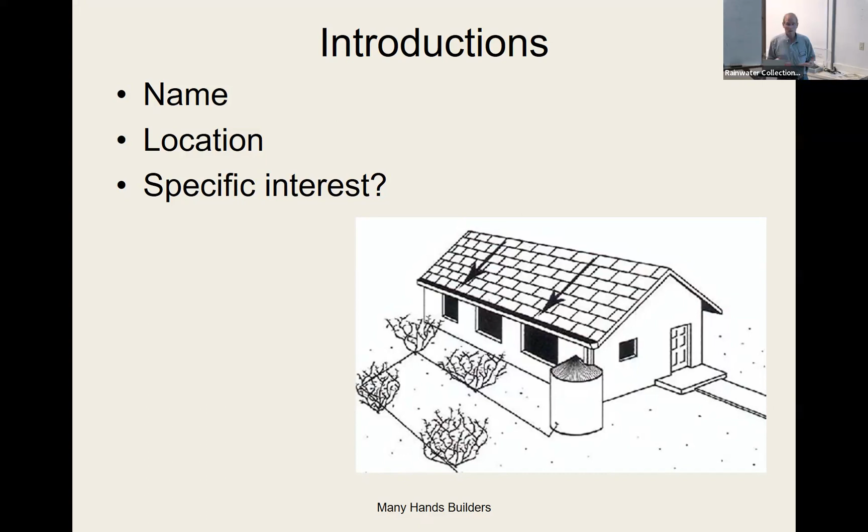Okay, and then specific interest. Are you here to learn about just supplementing an irrigation supply for gardening, or for fire suppression, for potable water perhaps? Show of hands for just fire suppression - how about, that's about maybe 6 people. Show of hands for people mostly interested in irrigating, garden, landscape, that sort of thing. It's almost everybody, and that's probably what in my career I saw people being most interested in.

Okay, so we're going to talk about the things you do before you invest in a rainwater catchment system. This is something that Angie Boudreau, who used to work for the Soil Water Conservation District here, made me promise to do when she dragged me into this business 13 or 14 years ago. She said, don't just put a tank under a gutter.

Make sure people do all the other things first because they're going to save a ton of money. So the first dozen slides or so have nothing to do with tanks and collecting the water - it's how you make the rainwater that falls on your land do you some good, or more good than it does. Then it's determining the water demand, estimating your potential collection given your surface sizes, your roof surfaces, then all the elements that are part of a rainwater system. For example, the roof, gutter, a first flush device if you need to use it - not everybody needs one. A filter of some kind that takes the leaves out of the gutter or out of the water stream. And then the conveyance, the piping that takes you to the tank, and then the way you get the tank to the point of use, whatever that is, whether it's going to be a garden or a fire hydrant. So we'll take each of those elements in turn and talk about your options.

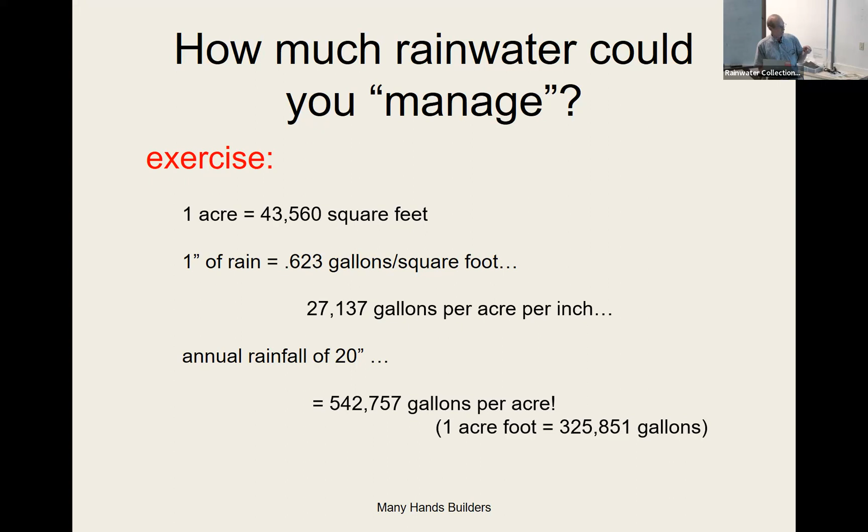Just for reference though, an acre foot is what irrigation rights people have. Does anyone here have irrigation rights to a ditch or anything like that? Okay, so your allotment is measured in acre feet probably, and you may have half an acre foot or a full acre foot - that's how much water you have access to. So the comparison is pretty dramatic, right?

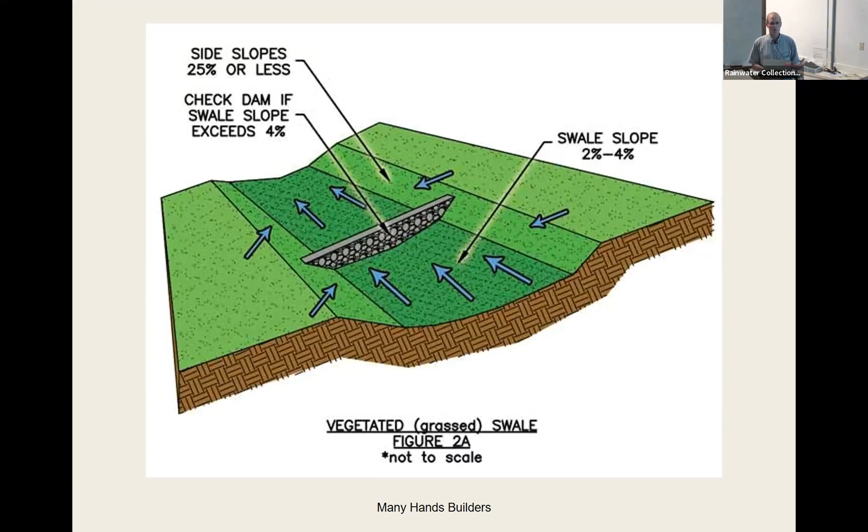You could do a mulch basin, which is very common in gray water design, where your gray water pipe ends would go into a basin where it would drip down to the base of the tree. You could also do things like this, where you put in a check dam on a dry stream and just slow the water down. You're not trying to create a pond, you just want to slow the water down so it infiltrates the soil where it might do the roots of the plants around it a little more good.

So do things like this first. If you have tractor lanes, paths, or driveways and you see erosion on them, consider grading it so that the water is spilled in a place you want to control, where it goes to a group of trees you've planted, perhaps. These are called, on trails, grade dips or nicks, but you could do these on roads as well. That just controls the direction and flow of the water so it doesn't erode your driveway or path, but you can control its direction and make sure it goes to a point of what you feel is a beneficial use.

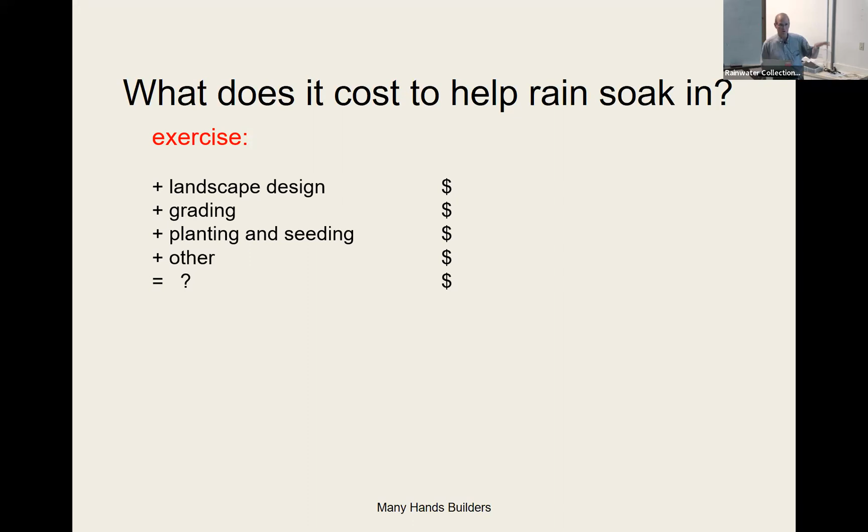Okay, I've anticipated part of that. I know that my cost for someone operating a grader or any type of heavy equipment is about $1,000 a day. I'm going to guess at a design fee, let's say it's $1,000 for an acre for something fairly simple. For planting and seeding, I might go to Plant Oregon or Shooting Star and buy some native plants, and that might cost me another $1,000. Buy a bunch of seeds and things, another part of that $1,000. Other costs might be adding an irrigation system to keep things wet while they're growing, before they have enough root to survive on their own once I turn off that water. So let's say we have a $4,000 cost here to do some of these basic measures to help water infiltrate into the soil better. This is cost per acre.

Now, remember that number of about 5 million gallons per acre of rainfall? If we divided that 5 million gallons into that $4,000, does anyone have their calculator open right now? What is the cost per gallon to invest $4,000 to do a better job with what looks like 5 million gallons of water? I'm sorry, it wasn't 5 million, it was 500,000 — I forgot what the number was. 542, right. So what is that? What's the cost?

So before you spend a ton of money, 75 cents to close to $3.50, $4 a gallon on a rainwater catchment system, think about all the things you can do that are much less expensive. Now, the disadvantage of all these measures you do to improve your landscape so it'll let that water infiltrate better is that you don't control when you get to use it. It's not available to you in July, August and September. That's the downside. But if you do these measures, you might not need to irrigate in June, and you may be able to stop irrigating sooner because the rain that falls in October might make a bigger difference for you. So you shorten the window of time that you need to irrigate.

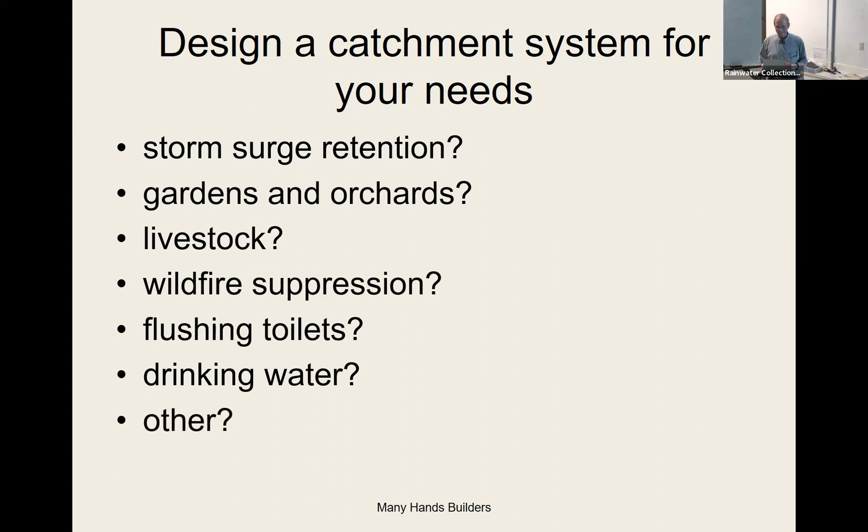Gardens and orchards, people mentioned that. Livestock, anyone here looking for that? We have some livestock, right? Wildfire suppression, pretty big issue for most of us. Flushing toilets, anyone interested in that? Okay, good. And then drinking water, how about potable water systems? Yeah, okay, that's a complicated one, but it's doable. And then the other might be something like landscape features, pools or water fountains, things like that.

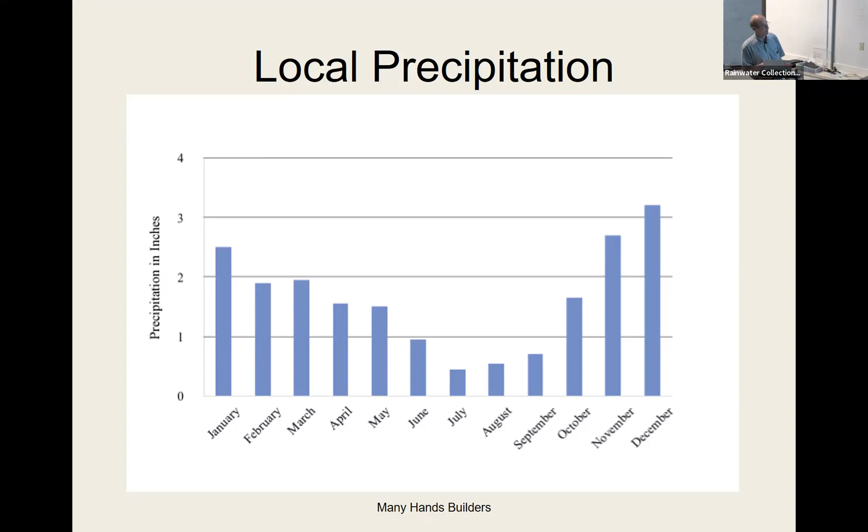Because of our topography, we have a lot of varied rainfall. I understand that up along this area, as you're approaching the Cascades, you get more rainwater than if you're in the valley. Parts of Sterling Creek and the drainages just south of us here are in the 13 to 14 to 15 inches a year category. But over here on Thompson Creek, I have friends who report 30 to 40 inches a year. So it's a lot of variety based on topography. If you have an idea of what you're getting in your area, ask a neighbor who has a rain gauge and they can tell you. That would be really helpful because that's going to help you plan the next steps.

A little bit about permitting - this is not a fun subject.

It's kind of dry and boring, but first question: is it legal to capture rainwater in Oregon? The answer is yes, it always has been.

It's never been illegal. It just has to come off of a roof and go into a tank. It can't go onto the ground and then into a tank. It has to go into a tank directly from the roof.

So if irrigation system is your only use, then you do not need a permit in this county, but there's some conditions on that.

If it's a potable system, you have to follow all of the requirements in Measure K or Appendix K, which are pretty stringent because they don't want people getting sick, and that makes sense. We'll get into what those are.

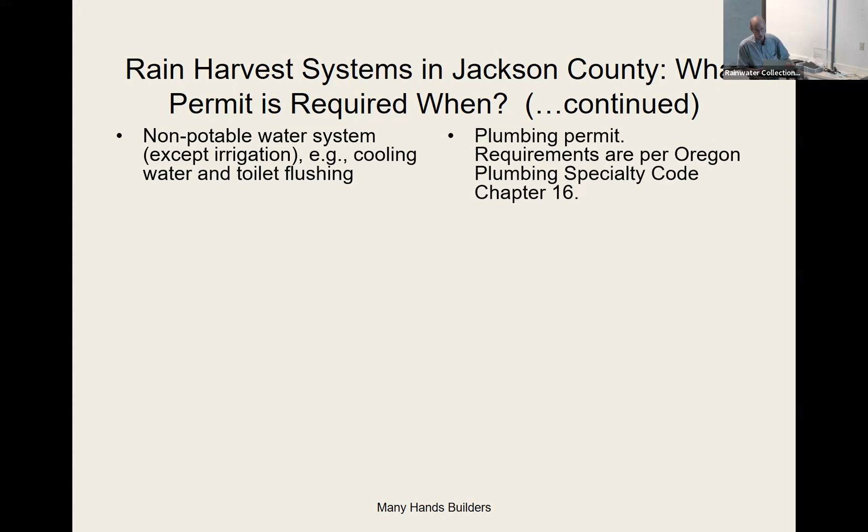For a non-potable system for cooling, evaporative cooling, or for flushing toilets, you need a plumbing permit. There's a whole code on how to do this. Your plumber would be familiar with that. You can download the code if you can find it - they hide it on the internet.

For electrical equipment, if you're going to power that water or pressurize it in any way, and want it hardwired into a panel, you have to pull an electrical permit for it as well. If you're lucky, you can use gravity to do all your pressurizing and won't have to worry about that.

Anything larger than 5,000 gallons, a single tank larger than 5,000 gallons, has to have a building permit. The reasoning is that the county's concerned these things are getting to weigh something like 40, 50, 60 tons, and they want to make sure the ground underneath will support it, that it's got the proper pad, and that in an earthquake it won't roll down onto your neighbor's property. So there's a reason for that.

But if you had a series of 5,000 gallon tanks all linked together, let's just say there's some ambiguity there.

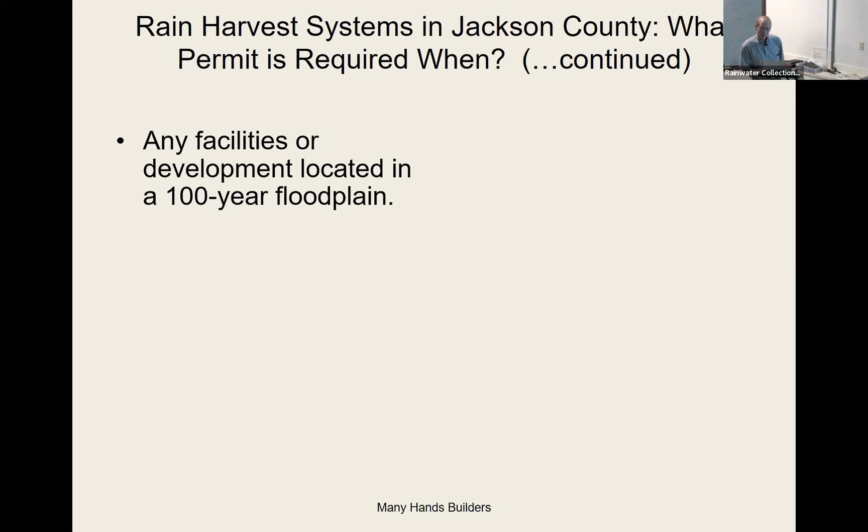Any facilities that are in a floodplain have to go through a review process. And most of us probably aren't in a floodplain, guessing.

The Soil Water Conservation District is a fantastic resource, and I highly encourage you to explore working with these guys. They have grant funding and grant writing assistance, and Cora Mousseau - here's her contact information, it's in the handouts - is a fabulous resource on this. She talks about conservation all over the county, so she's really a good person to be talking to about this. You might get tanks at a discount, you might even get a huge screaming deal on a tank.

If you live in a city like Ashland or some parts of Jacksonville, you may need to comply with some historic district issues. They don't want a big plastic tank in the front yard of an old mansion of some kind. Typically there's a height restriction, can't be over 6 feet. They want to make sure there's enough clearance in the side yard so fire department personnel can pass through with hoses in case they have to get to the backyard. But those are really the only requirements. They don't want to discourage people from having a rainwater collection - there's just some conditions that they want to make sure people are aware of.

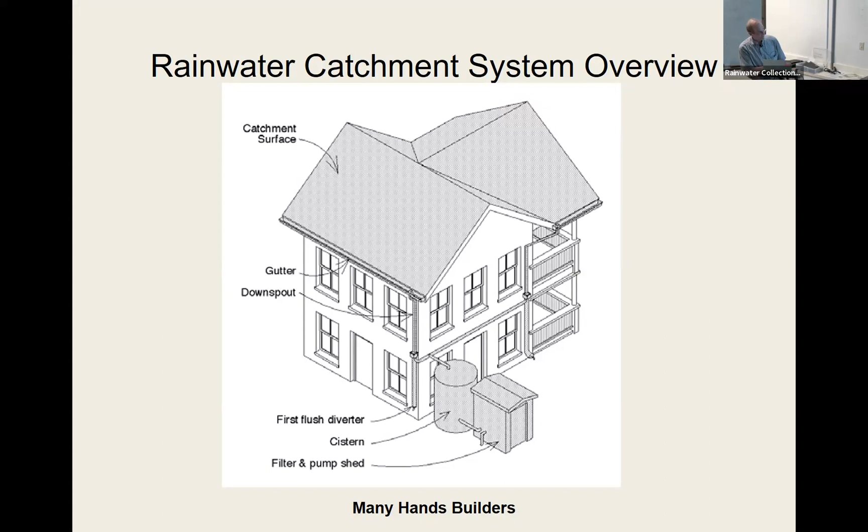Okay, so now we're going to jump into the actual rainwater collection systems. An overview one more time of all the things in here. We're going to start on the roof, look at gutters, downspouts, any type of first flush device for filtration on that downspout, the tank and the types of tank options you have, and the ways you get the water from the tank to the point of use.

The easiest way to determine your footprint for your roof, if you don't have your building plans and don't want to get on a ladder with a tape measure like I used to do, is you go to Google Earth. They have this really cool feature in the toolbox that has a tape measure on it. You click on it and you can go from that corner to that corner, to that corner, to that corner, and it'll give you a graph and tell you the square footage, or it'll at least give you dimensions so you can calculate square footage on your own.

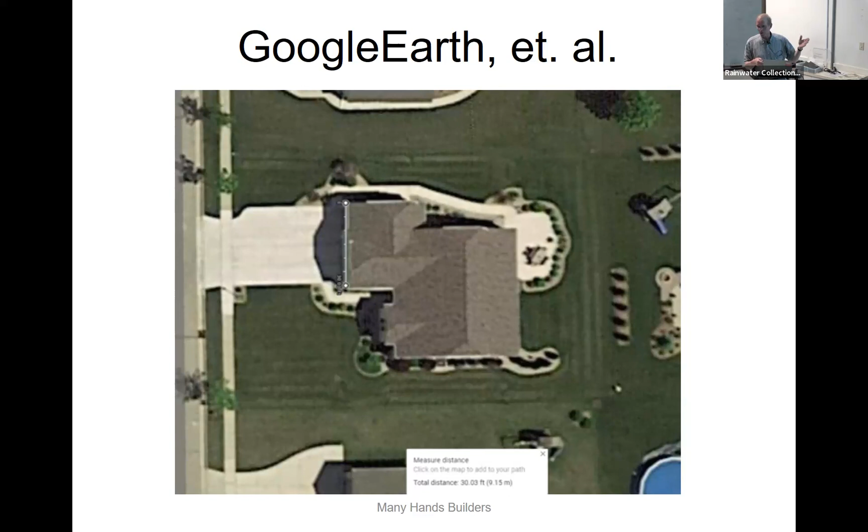And it's a great tool. I believe it's still free - I can't remember, it's been a while since I used it. There are actually roofing programs that, if you know a roofer, they could do this for you as well.

So question, exercise here. How large is your roof? Does everybody here have an idea of how big the roof is? Okay, take just 30 seconds and take your square footage of your roof size, multiply it times 0.623, times the average rainfall depth that you believe you have in your area. And I want to hear some numbers. I want to hear what you think your roof can collect.

12,500 gallons in a year. Okay, anybody else? 41,000 gallons in a year, okay?

I'm going to throw in my number. It's 55,000 gallons. I have a house, a garage, a couple of outbuildings, a shop, a bunch of stuff. They're all connected to my system. I collect a lot of water. I could collect a lot of water. I wished I had that many tanks. Anybody else have numbers?

10,800. Okay, that's without the safety factor. The safety factor is for water that splashes off the roof or might get lost in transport. Subtracting 5 to 10%, you could just multiply it times 0.95 and you're good to go.

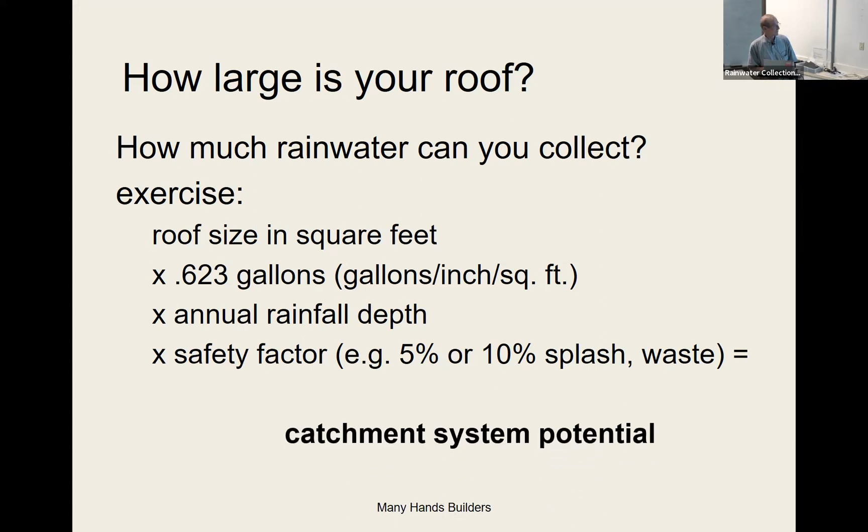Most people are startled by the amount of rain they could collect in a year off their roof. That's a big number for most people, and it's way more than is going to fit in the typical plastic tank. That's kind of good news. I mean, it's not like it's not a worthy thing to do, it just means you need a lot of tanks to collect all the water that comes off of a roof. That's your catchment system potential.

Now moving on to the type of roof. The cleanest water that can get into the tank is coming off the cleanest roof, and that would be a metal roof. There's just less stuff on the roof, grit, pieces of wood, whatever that might get caught up in the water supply and then get deposited either in your gutter or in the tank itself. So if you had a choice and you had roofs that had metal on them, that's where I'd put a rainwater collection system.

Followed by tile, which is also a hard surface, doesn't really shed material off of it, but has lots of nooks and crannies for moss and things to grow, and that would end up in your water supply. Followed by shake, which is a bad idea in a fire-prone area, but it's also cleaner than asphalt shingle, which is unfortunately the most common roofing system that we have anywhere in America.

But a lot of people use these kinds of roofs for irrigation, fire suppression, and everything else. So if you have this, don't just go out and get a new roof because of the asphalt shingle. You could still use the water, you just don't want to be drinking it. It's too hard to filter the hydrocarbons out.

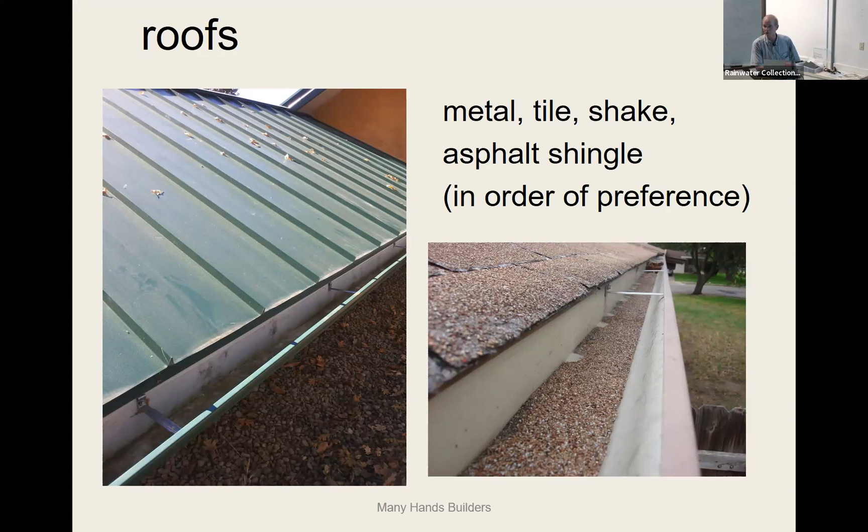Okay, right button. How many of you get snow 6 inches at a time, 10 inches at a time, and then it slides off your roof? Anyone have that problem? Not very often? Okay, it happens to me every year. I lose at least 2 inches a year—2 inches of water, because roughly 10 to 12 inches of snow is an inch of water. So I lose 2 inches every year.

And if I were worried about it—people in higher elevations maybe—you can install these snow brakes on roofs that will prevent that snow from sliding. If 2 inches is going to make or break it for you, then I definitely consider snow brakes.

A little bit about gutter anatomy. They attach to the board that caps the rafters, called a fascia board. And they can attach in a couple of different ways - they have straps, screws or nails, or a bracket, but they have to be pretty secure.

Gutters usually have a drop or a hole that's 2 or 3 inches in diameter in our area, which drops into the downspout itself. So that's kind of the anatomy you're looking at.

Rolled gutters - that's where you see the gutter companies that come out with a big coil of steel, fold the metal through a form, and put this 100-foot length of metal on your roof. That's the best way to go because it doesn't have joints that leak, but you can use sectional gutters as well. Those are the ones you'd buy at the big box stores.

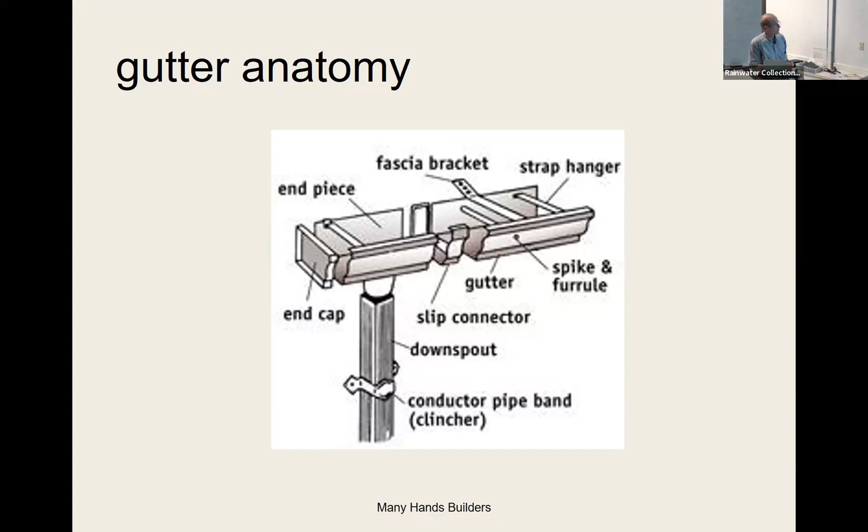Gutter sizing - we're not going to get too deeply into this. I highlighted it on my presentation, but it's not in your copies. Every part of the country has a 100-year storm event average, and ours is 1.3 inches per hour. That's what we expect in a major rainfall event in an hour. In the news recently, you might have heard of storms in Kentucky where they got 6 inches in an hour.

New Orleans typically gets 8 inches in an hour, Miami is the same - they get a lot of rain during a hurricane. So we're kind of on the low end of the scale. But that's the maximum event you want to plan your system for, because if you get that kind of rain, your system should be able to handle it. Worst case scenario, if it doesn't, you just don't get all the water that comes off your roof because your system overflows. It's not the end of the world, but if you want to capture all that water, that's the number you have to keep in mind.

And then you know your catchment area, and you consult this really cool resource, which is complicated - I highlighted where you have to go. You don't even have to think about this much because the stores only sell the things for our area. If we were in New Orleans we'd be over here, or if we were in Kentucky we might be here. But thankfully we're under 2 inches in an hour, and the diameter of our gutters and the size of our roof tends to be right in that ballpark.

So if your gutter is sloped at an eighth of an inch, that size of gutter can carry that amount of roof water that comes off a roof. So you're good. If you wanted to increase the slope of your gutter, you could have a larger portion of your roof served. And if you increase it even further, a still larger portion of your roof can be drained by just that diameter gutter.

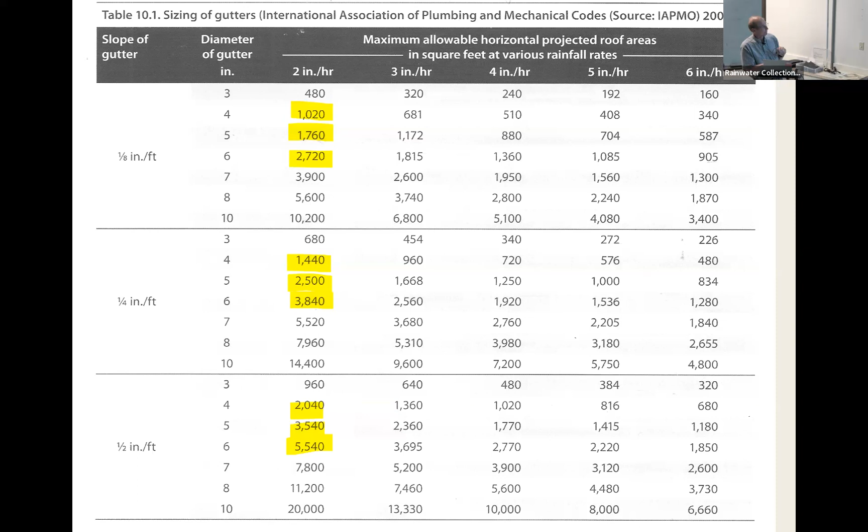It's influenced a little bit by the roof size, your downspout placement - if you're going to have one at each corner or one for the entire roof - and the fascia height. If you have a 6-inch fascia and the gutter itself is 6 inches tall, and you have a 60-foot long roof, at some point the gutter is going to be hanging in air because it just can't drain. There's nothing to attach it to.

And then aesthetics - a lot of people don't like the look of something on their house that's sloped. It makes it look like the house is crooked. But if you slope it, it's more functional for the water supply because you don't have water standing in your gutters.

For potable water, this is really important. It's required that you slope it 1/16 of an inch per foot - more is better. This comes from Appendix M, which is what Appendix K replaced. I like Appendix M because it was 3 pages of what you should do. Appendix K is 1 page of references to 27 other pages in the code that you don't have copies of. So it's inconvenient to use either Appendix M or Appendix K, but basically you have to have a 1/16 of an inch slope per foot if you're going to use it for potable use. So this is what kind of happens if you don't have something on your roof or in your gutters to prevent them from getting filled.

We have oak leaves, madrone leaves, acorns, pine needles, there's all kinds of stuff. In fire season, if this is in your roof, what do you think would happen if an ember landed in that? It's a problem. So gutter screens are probably a good idea, and while they're not required in a rainwater catchment system, they're not a bad idea because they keep all of that from getting into your water supply.

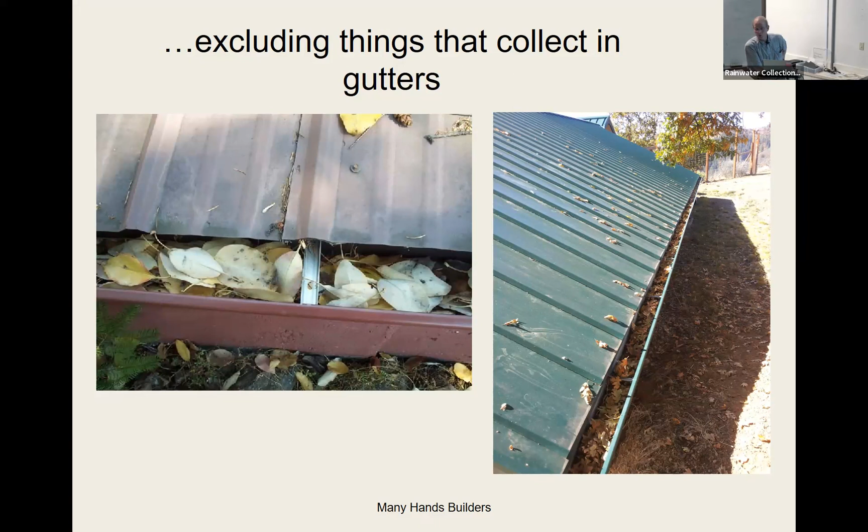So the first thing you can do is put one of these strainers in the drop, and that keeps at least the big stuff from making it down the downspout and into the tank. There's a couple different ways to do that. They're all effective at just keeping the big stuff in the gutter, but it still doesn't resolve this problem of that stuff decomposing in the gutter and becoming like tea. As the water runs through it, the water that comes out is brown colored, very tannic, often if it's on oak leaves and such. We call these tea bag strainers.

There's another type of system you can get at the box stores. It's simple metal or plastic screen. The plastic doesn't last very long in sunlight, 3-4 years, and they get very brittle, so they're kind of a throwaway. These metal screens have a fairly large hole, so they will also catch pine needles and leaves, which will decompose right on top of the screen and eventually get into the supply.

And there's also these fiber screens. It looks like Brillo pad material that you can stuff into the gutter. It also ultimately functions like a tea bag because material gets stuck in them and the water courses through that material and suddenly your water is brown.

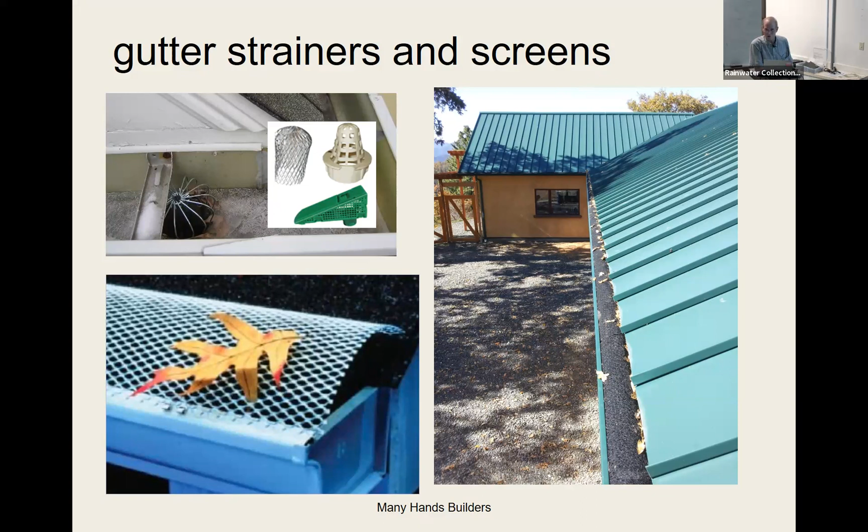What I like to see people use is something like this. Stainless steel - it's not going to burn. Keeps out all the fine debris except for really dust particles and dissolved solids like bird poop. It's very durable, virtually maintenance free. All you have to do is put an umbrella hook on your hose - have you seen these? You don't have to get up on a ladder. You just walk under the gutter and just hose down anything that might be caught in this little trough here.

Once a year. Downside: stainless steel is not inexpensive, and water cascading down the roof in a hurry during a rainstorm can sheet right over this until the surface tension from the screening material - it's about a 30 micron mesh - can suck that water down. So you might lose some water at the beginning of a rainstorm. Hasn't been an issue for most of the times I've installed this kind of thing, but people do notice that the patio below will be wetter than when they had nothing on there. It's because they've lost a little water. That's where that safety factor comes from, where it splashes off the roof.

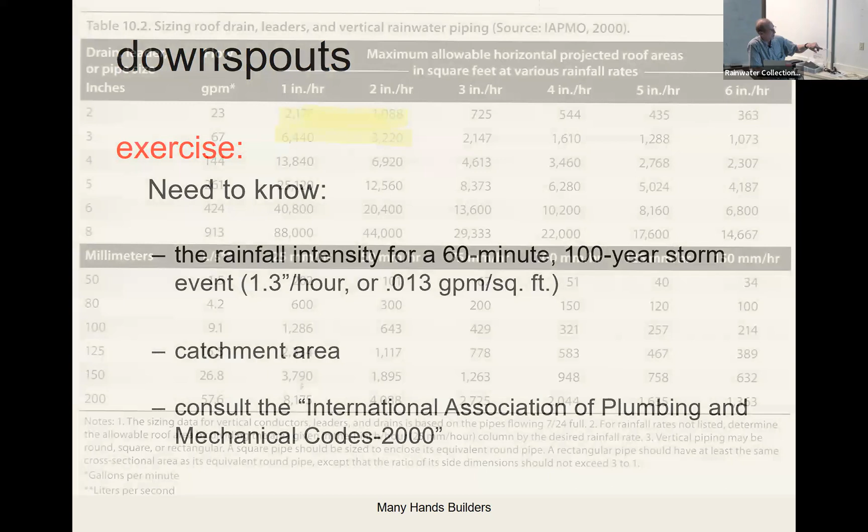Okay, downspouts. It's another one of those exercises that you don't want to have to get a copy of this because it's complicated and expensive. But for downspouts, the sizes you have access to in our area are 2 and 3 inch drops. That's the size. And then the actual surface area of the spout may be 4 to 5 inches. But if we have that 1.5 inches or 1.3 inches per hour, that's the size of a roof that a single downspout can drain. And most of us have 3 or 4 downspouts on a roof this size. So we're in the clear.

We don't have to worry about this. If we were trying to put a single downspout on a 12,000 square foot barn, that would be a problem. You'd want to look at this chart and size things a little differently. But for residential use, we're doing smaller buildings. If you go to the store, or whatever the gutter folks who show up to put gutters on your roof have, or you just get up there and you can see you've got a 2 to 3 inch diameter downspout, you're good to go. You don't have to worry about it.

For things like gutter screens - how many of us have acorn woodpeckers as our companions out in our properties, right? They're hysterical, I love these guys. They find - I mean, everything is a granary to them, right? I cannot tell you how many gallons of acorns decomposed over a decade that I have found in my gutters. They're amazing creatures, and you want to try to keep that stuff out of your water supply.

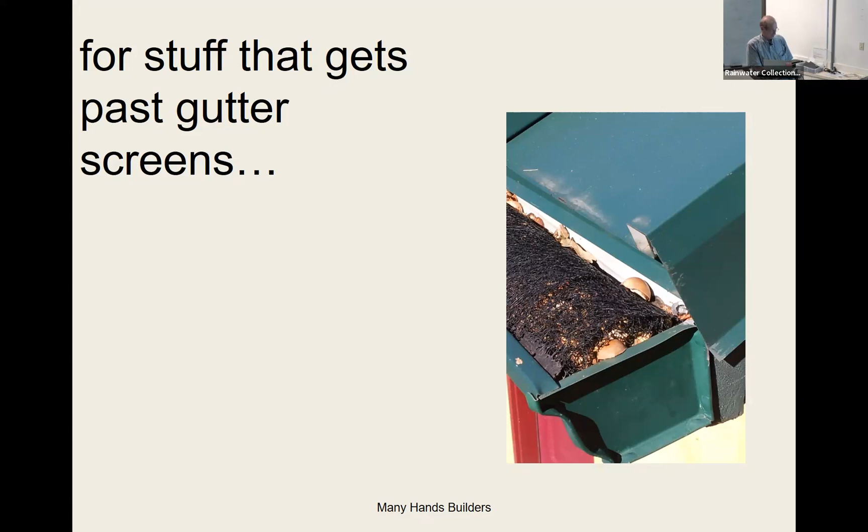So there's this - you can put this device, I have one on the table up here, a downspout screen at the bottom of your gutter or of your downspout that has a slope to it that would shed debris but allow water to pass right through the screen. That's a convenient way to keep material out of your water supply if you don't have those gutter screens up on the roof or up on your gutters.

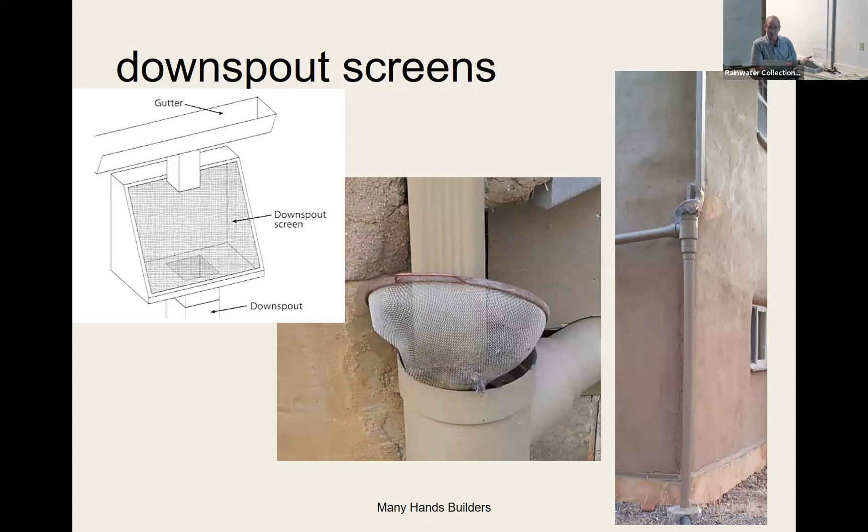Now, people have gone low tech. I've seen this a number of times. A spaghetti strainer is about the same mesh as the one you get commercially, and this is actually a very effective solution so long as it's not on the top of - you need an 8-foot ladder to get to it because they do need to be emptied periodically.

These are pictures of this system, which is available through Rain Harvest Systems out of Atlanta. I think they're about $40 or something like that. They're designed to be used with Schedule 40 piping, so if you're using sewer pipe, you'll need an adapter, but you can find those. The lid comes off so it's easy to clean, and they can be painted to match your house trim, and they're more resistant to UV light. It's a great solution if that's the only filtration going into your water tank.

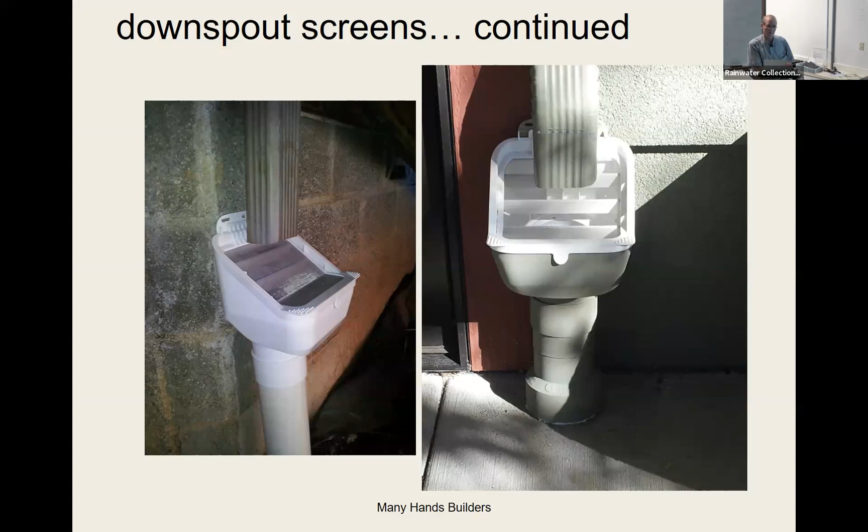Around the country, people use things like basket strainers. I don't recommend them because they need to be cleaned out after every single rainfall event, and they're messy. They don't self-clean.

You can also get something like this. You'll see one of these on the tour Saturday, which is a whole-system screen. It uses a 4-inch pipe, and water comes in, goes across this surface, and anything wasted—acorns and things floating down—gets deposited here, while the water goes into the tank itself. But that's for commercial systems. I happen to have one because that's what I did—I had one and I put it on.

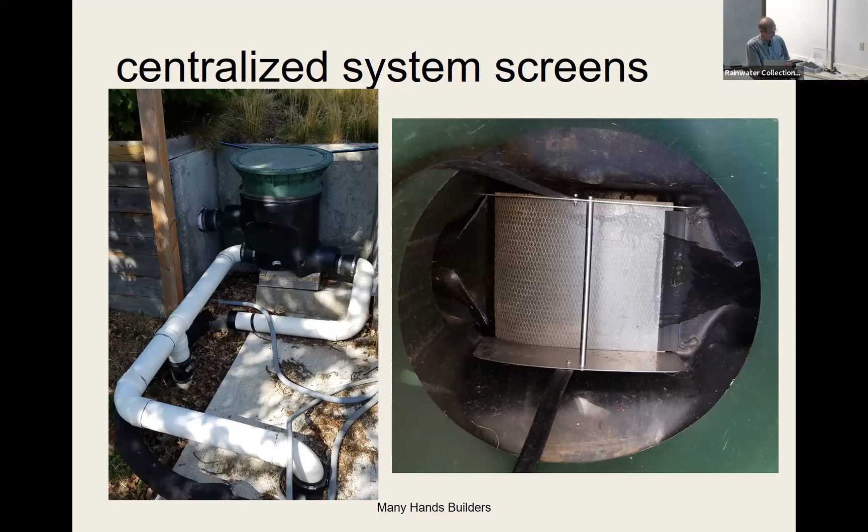Roof washers are common and really easy to work with. They're usually made out of concrete—you can fabricate your own or purchase them. Water comes in, hits this baffle, the heavy stuff sinks, and then water flows over the baffle and is filtered through this, usually a stainless steel screen, sometimes some sort of fabric, and then down into a tank of some kind. This chamber has to be scooped out periodically because that sludge will stay there, and you just want to remove it periodically. But again, it doesn't self-clean, so I haven't had to install one.

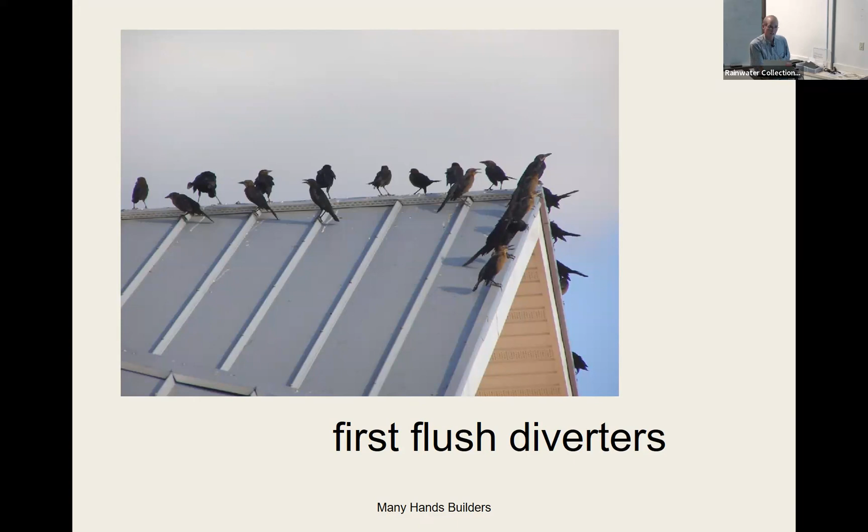So the gutter screening devices I've talked about—the downspout filters and gutter screens and everything—will keep everything out except for dust, pollen, and dissolved bird poop. That's where you might want to use a first flush system. Someone asked if that was required, or if I'd talk about that. Yes, they're required—a first flush diverter is required with potable systems and not for anything else. It's not required on a rainwater system.

The question is, how much do you flush? This is really based on how dirty your roof gets between rainfall events. Do you live near a freeway, or a field that's being plowed frequently? There's a lot of dust in the air. Do you live close to dusty roads where the roof is full of dust all the time? Do you have a lot of trees dropping pollen on the roof constantly getting into your water supply? Those are questions only you can answer.

Typically it's between 1% and 4%, or 1 to 4 gallons per 100 square feet—10 to 40 per 1,000 square feet—and that's how much water you want to discard in that first flush of rain that cleans off your roof. Here where we live, most of our dust is in the spring, summer, and fall, and there's no dust in the wintertime because it's raining, and then it's dry, but there's no dust produced from roads because they're all wet. So you really only have to wash your roof off once or twice at the beginning of the season, and then you could probably disable your first flush system if you wanted to.

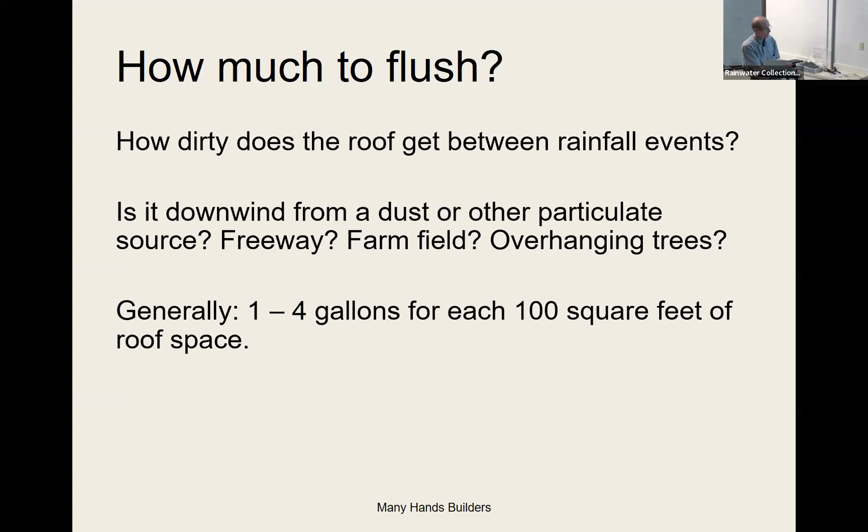So we have a first flush diverter exercise. You take your roof size times that percentage—if you get a really dirty roof, go with 4%; if not much dirt, go with 1%. That's your first flush volume.

A lot of people are very fond of a low-cost tank, which is a piece of pipe. In your handout, you'll see that any length of 3, 4, 5, 6, up to 12-inch pipe will give you a certain number of gallons. So if you need a 12-gallon system and you happen to have a piece of 12-inch pipe, you need 2 feet of it, and you've got your tank for your first flush system.

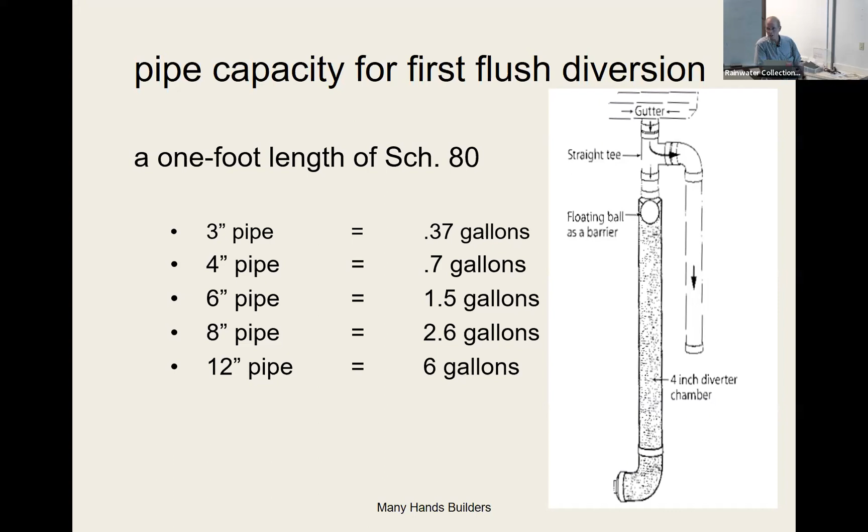This is just another exercise on how you would calculate that if you went through it. I'm just going to show you pictures here of first flush diverters. Does anyone have any questions about the need for these?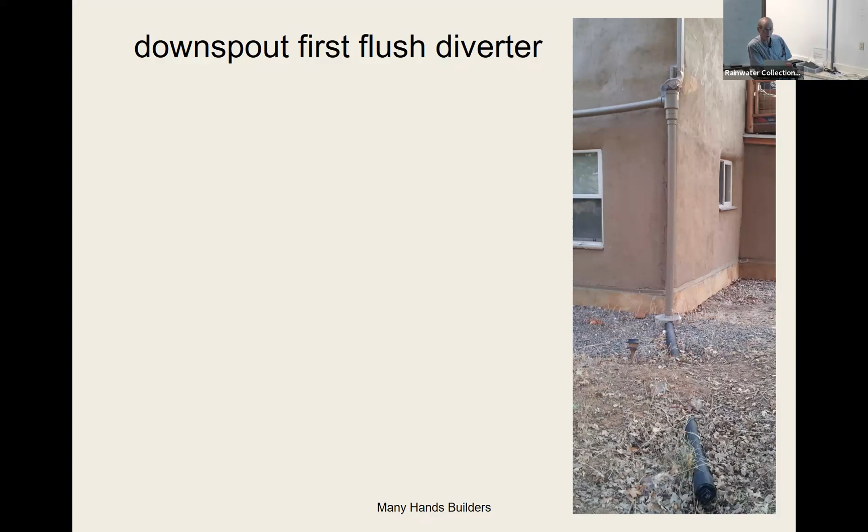Here's one where water goes through the filter, straight down to the bottom of the first flush device, which has a pinhole in it again. The ball floats all the way up to this joint where it then prevents any water from going down, and the rest of the water is diverted into the tank.

And here's one for a very large roof, but with a very small first flush volume, probably because there's no trees around and nothing really to get on the roof. I don't know if this is near an airport or what, but it's just an example of a very simple first flush tank made out of a piece of pipe.

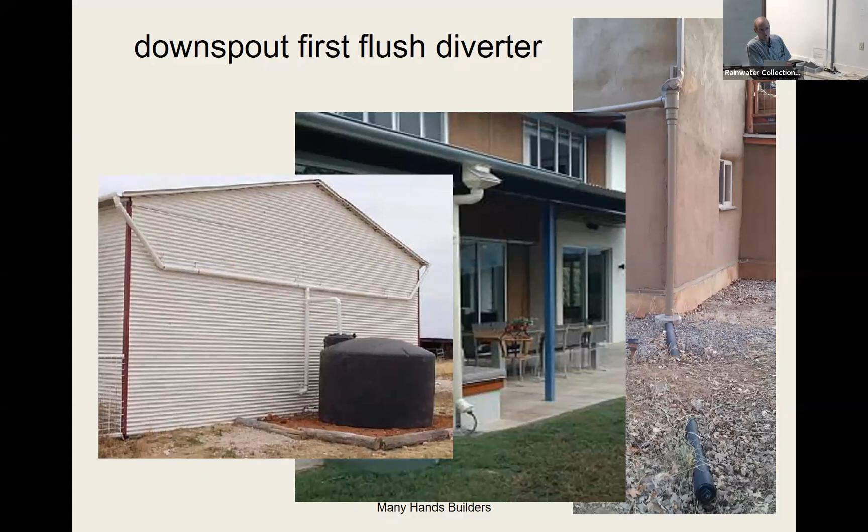Do you clean that flush pipe out after every storm? If the water is clean, no. But if you have an asphalt shingle roof, the particulate from the roof will clog that emitter. That's the only time I've seen those pipes burst, because asphalt shingle grit clogs the emitter, it freezes, the pipe bursts and has to be replaced. But if you don't have asphalt shingles, you don't have to clean it out ever, or maybe once a year, because the water just drips out and then the next storm fills it up.

Isn't there leaves and stuff in there? No, because you usually have some kind of screening device. In this case, this gutter screen here takes care of that. In most other cases, you have some sort of downspout filter that keeps that stuff out. If you don't do the screening, yes, you would have to clean it out every single storm because it'd be full of gunk. Absolutely.

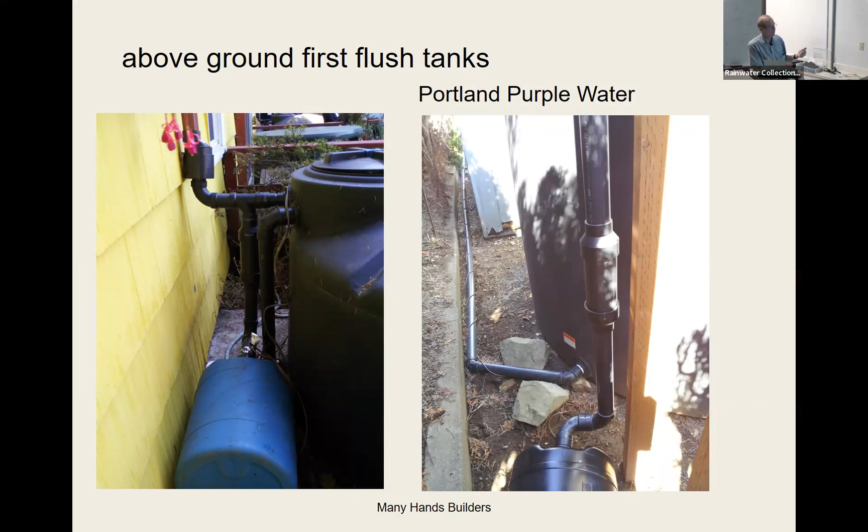So there are above ground tanks too that you can purchase. These are, I think, 35-gallon barrels on their side that could be used. These were done by a company up in Portland called Portland Purple Water. I'm not sure they're still around. I took these pictures probably 12 to 14 years ago, but they did a lot of this kind of work up in that area at that time.

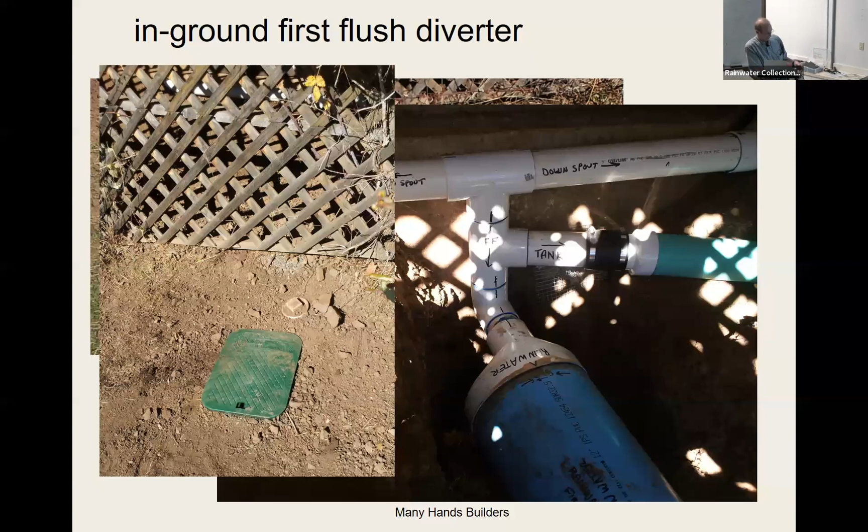This is actually Hope and Neil's system. Once that tank is buried, you see this port that you can access, a valve that can empty the tank periodically if you ever need to. There's a pinhole right here, and then you just turn this off, turn it on, and empty it once a year.

So now we get on to how you get the water from the gutter down through whatever filtration system you have, and into the tank. When we talk about something being a wet conveyance, that means that when it's not raining, the conveyance, the pipe, is still full of water. It's essentially part of the tank itself, and so as the tank water level rises, so does the water in the pipe.

Now, if we didn't live in an area where it froze with some regularity in the wintertime, this would be a great way to go, because you don't have to worry about hitting your head on a pipe crossing from your gutter to a tank next to the house. However, we do live in an area where you could see these pipes freeze.

Unless you put heat tape on them to keep them from freezing, most of the systems I've worked on have been dry conveyance, which means that when it's not raining, the pipe that goes into the tank is dry. You can have dry conveyance systems where the pipe is underground, but the tank is usually located many feet away from the house and downslope quite a bit, so the pipe is still dry when it's not raining, even though it could be buried.

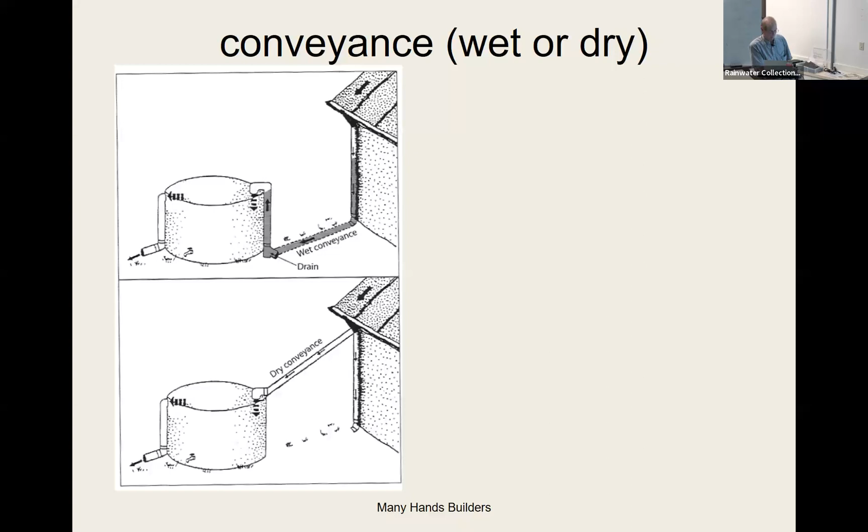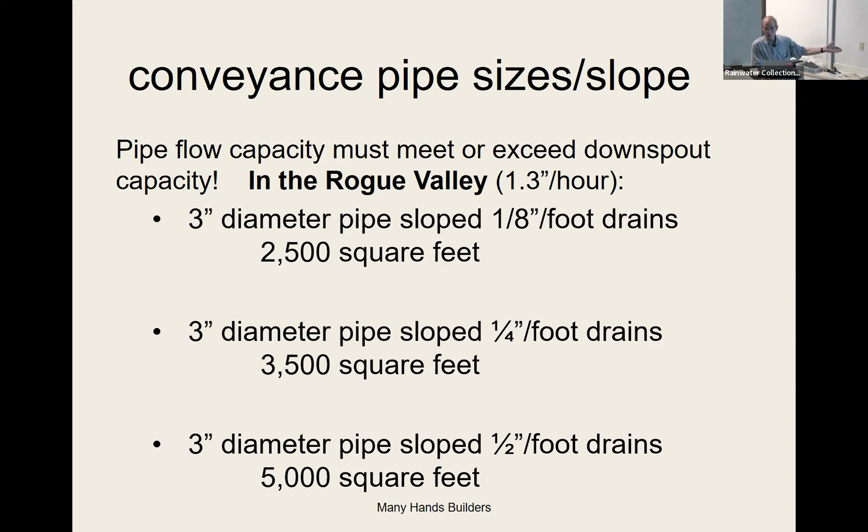There's also a way to calculate pipe size, but most of us are going to use 3-inch pipe. It's going to work for almost everybody unless you have 6,000 or 8,000 square feet of space you're draining, and then you're bumping up to 4, 6, and 8-inch pipe. But 3-inch pipe can carry an enormous volume of water. If you slope it at 1/8 inch per foot, it carries enough water that would fall on 2,500 square feet, and the greater the slope, the greater the square footage you can evacuate water from. The plumbing code has a big chart that gives you all that information if you wanted to peruse it.

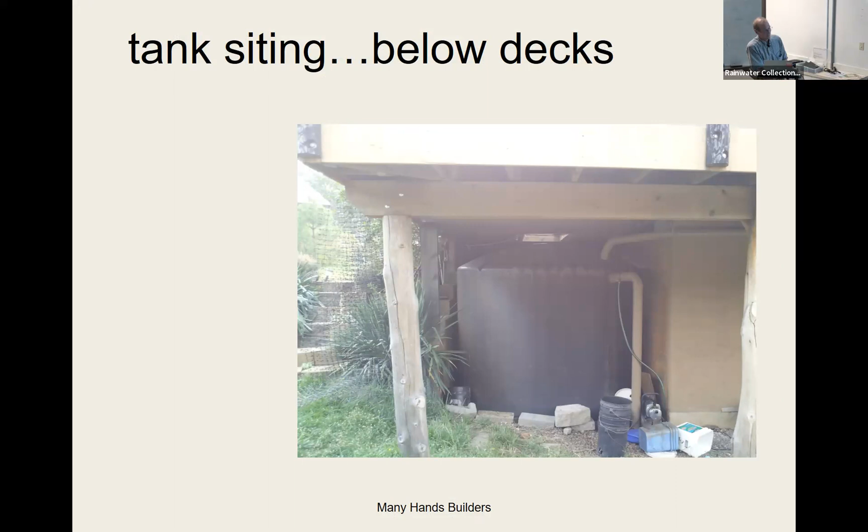Tank siting is always a big question because they're big—sometimes a little obtrusive, sometimes a little unwieldy. Below decks has been a common place that people put tanks. I've worked on about 6 systems where that was the place the tanks wound up. To access them, there was a port or hatch in the deck which lifted up. Sometimes there's a latch on it so it can't be accessed easily—this one had a lock on it so the kids couldn't get in. Then you just undo those lids and you could get into the tanks to see what's going on in there. That's very common.

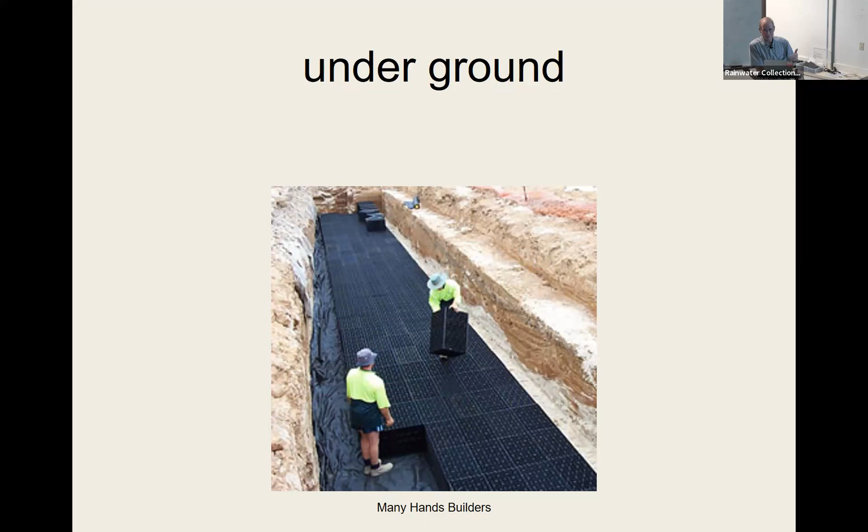Underground is pretty common but gets a little expensive. This is a commercial system that's basically a rubberized membrane with plastic grids laid down, and then they seal the membrane—so it's like a gigantic burrito with this plastic grid in it. Then it fills in with water, and then it gets buried. What I don't like about the system is it can't be inspected—I could never get in there to see what's going on. If it's dirty, if it needs cleaning, it's kind of a once-and-done system. But it's mostly commercial; you won't see this anywhere but big commercial projects.

Underground tanks are generally ribbed for reinforcement so they don't collapse when earth is packed against them and they're empty. They tend to be limited to 2,500 gallons in size—you don't see very large tanks available often. So if you wanted a large system, you need to link a series of these in a manifold.

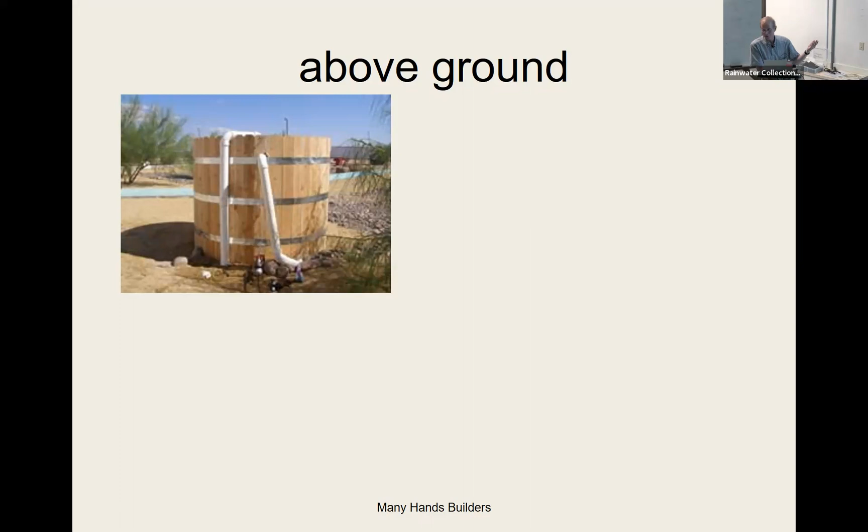Above ground, everybody's familiar with wood tanks, right? The beautiful wooden tanks I remember from my childhood. The problem is that when they're empty, the wood shrinks and then there's a crack, so they don't hold water easily—they need to stay full. Most wood tanks today come with a liner so that if they ever do get dried out, that's not a problem, or they're tongue and groove so you wouldn't show that gap. You can also use rain barrels, all linked in series with a manifold on the bottom. It's a great solution for urban areas where you can't get a big tank in the backyard.

A company called Bushman makes wall tanks in various sizes. They're relatively flat, designed for urban areas, ranging from 600 to 1,200 gallons. You can park them right up against the side of a wall in a side yard and still meet city codes about egress.

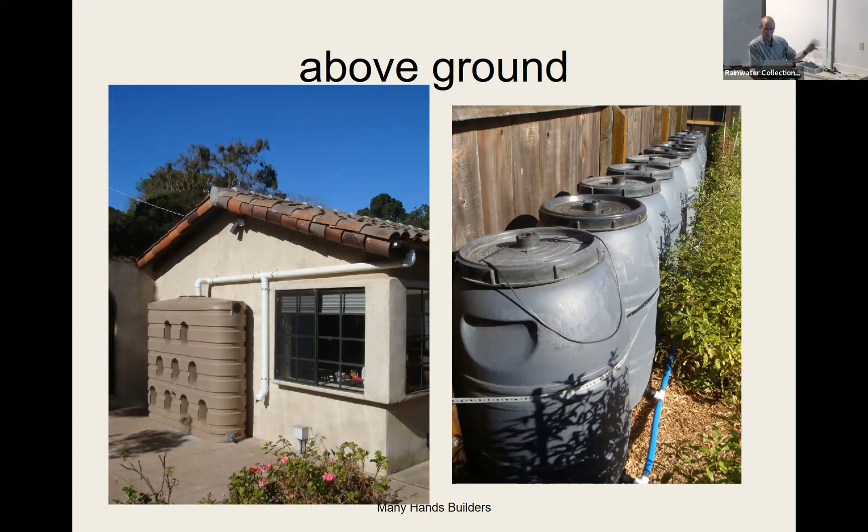But the most common tank that people are using today, and the sweet spot for cost per gallon, are these big plastic tanks. Not necessarily, but these are both 5,000 gallon tanks. They're called tuna can tanks. Norwesco makes them.

So at this point, if you're buying new tanks, this is the lowest cost way to put water into a vessel.

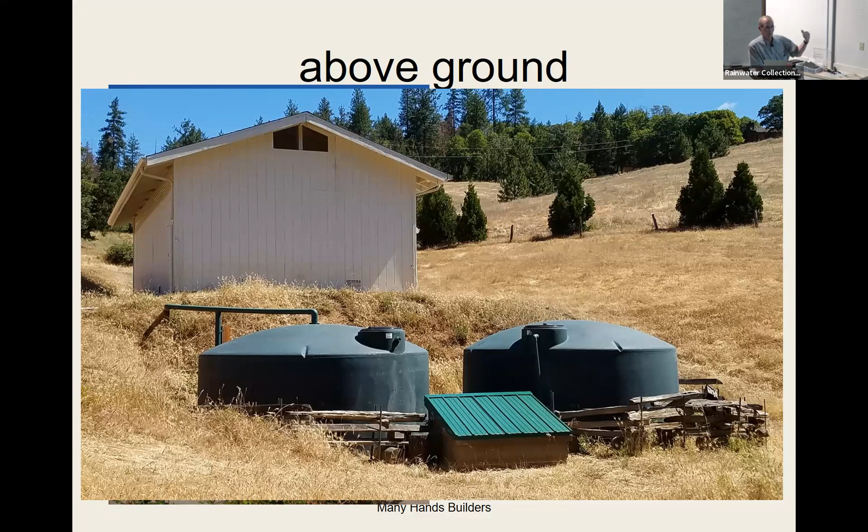A little bit about tank anatomy. Pretty much all tanks have a manway cover or access hatch that's already vented, so you don't have to worry about a separate port. As water rises it compresses the air inside the top of the tank, which could cause it to bulge unless the air can escape, so there's always a vent at the top. They always have an inlet, usually 1.5 inches at the top, and a 2-inch outlet at the bottom. They almost never have a built-in overflow.

You might have to install that overflow yourself.

They're almost always colored green or black so that algae doesn't grow inside the tank — the purpose is just to keep it dark inside. I don't know that there's a difference between green and black; I've never studied that.

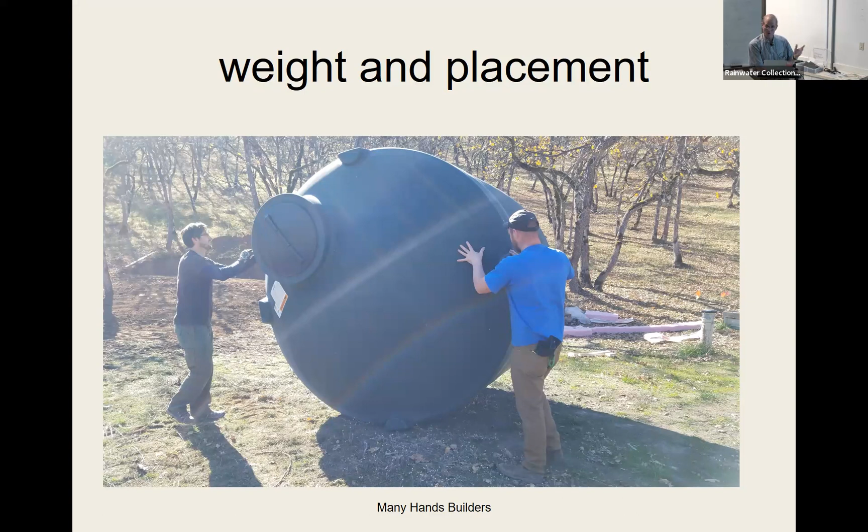On tank placement: this 2,500 gallon tank weighs 800 pounds, so you want a person or two helping you roll it around. That said, they're really easy to move when they're on their sides like this — you can roll them, and thank goodness, circles move like that.

Steel tanks are something I wish I saw more of in this area. They're considerably more costly, 2 to 3 times more than the plastic tanks. They're usually panels riveted together by the manufacturer's crew who comes to the job site to do it — that's part of the cost and why it costs so much.

They almost always have a vinyl bladder inside, because all those rivet holes would leak. So even though they look like steel, they're not actually in contact with the water — there's a bladder inside containing it. But they're fire resistant, extremely long lasting, not degraded by UV. Some people like the look of that more than a plastic tank — can't argue with them. They make them last longer than the life expectancy of a polyethylene tank.

For polyethylene tanks, the warranty is generally 25 years, or they give you a 5-year warranty and tell you it'll last 25 years if it's under a roof.

Are they repairable? Not that I know of. Once they become brittle, if they become brittle, I don't know how you'd fix that. If there's a hole in it you could repair a hole, but a big crack or something like that, I'm not sure how you'd fix.

Good question though. You can get these tanks up to 150,000 gallons. Anything over 30,000 gallons requires an engineering permit — that's just a state code issue. These tanks almost always have a concrete pad, and at 30,000 gallons an engineer has to have designed that pad. Again, these are usually installed by the manufacturer's crew.

Ferrocement tanks are really popular in areas where labor costs are very low compared to material costs, so not in North America, because it would take thousands of hours to build one of these. But if you're doing it yourself, this is a great project. This was done by one of my neighbors who had a hand in building the tank that I have.

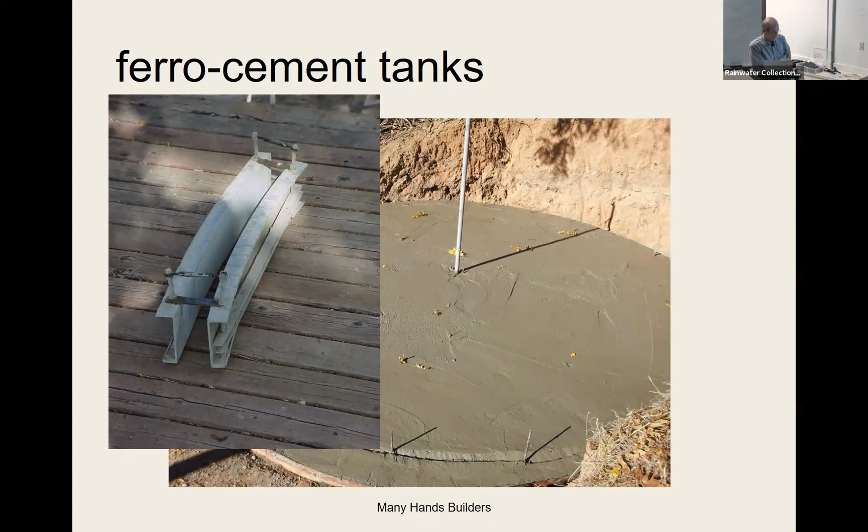You have this rebar reinforced pad, which has concrete poured on it, and a keyway is then put in the bottom of that. Then this really cool device, a lift form, gets slid around that circle continuously until you're built up to 8 feet tall. What results, this is only a partial picture, is this 8 foot tall, 27 foot diameter ferrocement tank with 4 inch thick concrete walls reinforced with rebar.

If the time lapse between when these lifts go on is a day or two, you're probably okay. But if it's longer, you'll get cold joints and the tank will leak at each of those cold joints, which is why this tank leaked until we coated the inside of it with a rubberized material. So these tanks can be really effective, but they're labor intensive. That's the top of what our tank looks like.

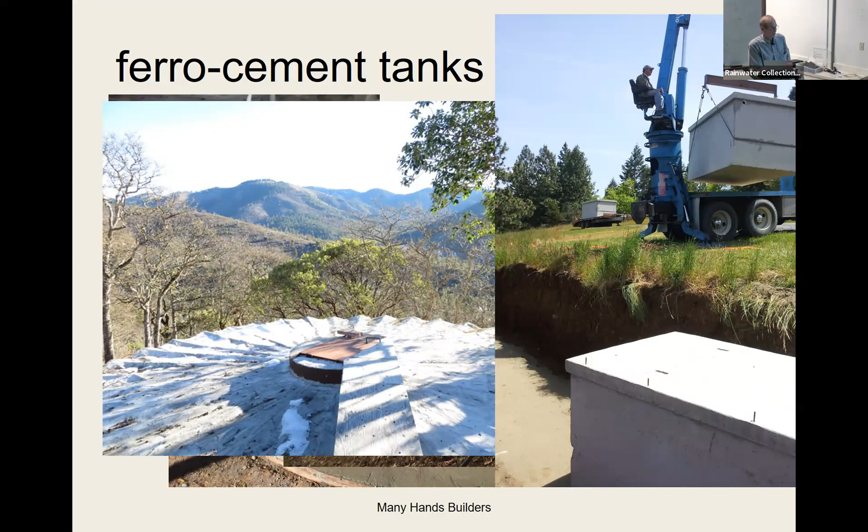You can get ferrocement tanks that are pre-cast. Copeland's in Grants Pass makes these concrete water tanks. They'll bring them to your site on a truck, crane them into position, and then you can connect them with manifolds, and you can build, as you saw in one picture, an 8,000 gallon tank. They're roughly twice the cost of a plastic tank, but they'll also keep your water cool if you're drinking it. That's important because they're underground.

That's why the county sometimes has issues with or wants to see what people are doing if they're putting in big systems. So if you're putting it on native soil, compacted gravel, or reinforced concrete, which is required for larger tanks, the tank's never going to move. You'll be fine.

Inlets and outlets. I took this drawing, which is in one of the books, and modified it a bit given the practices we see here. So water comes into the tank, and then it usually travels down to the bottom, with an upturn.

After some number of years, some of the dirt that comes off your roof is going to settle on the bottom of your tank, and you don't want the water splashing all the way down and stirring that up. So if you have a way to turn that water force around and have it go upward, that's better than having it all stirred up. You only have to do this on your first tank if you have 2 or 3 tanks in series, because this is called the settling tank. The first tank is always the settling tank.

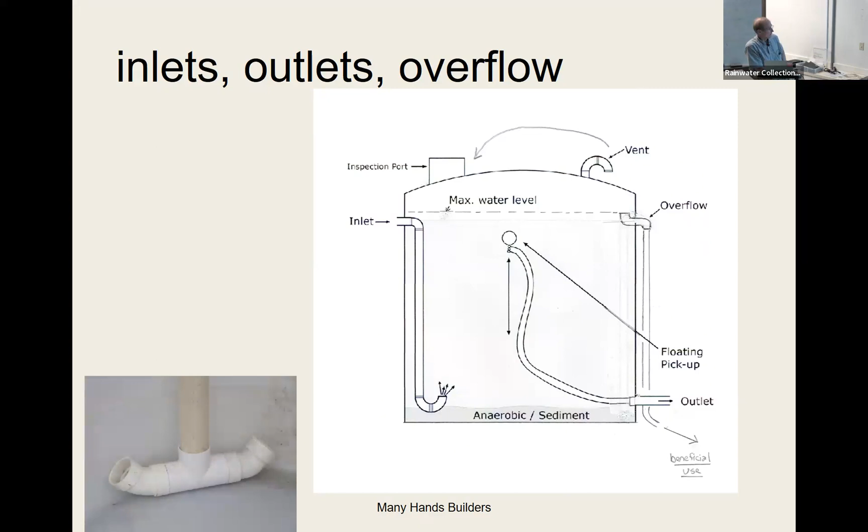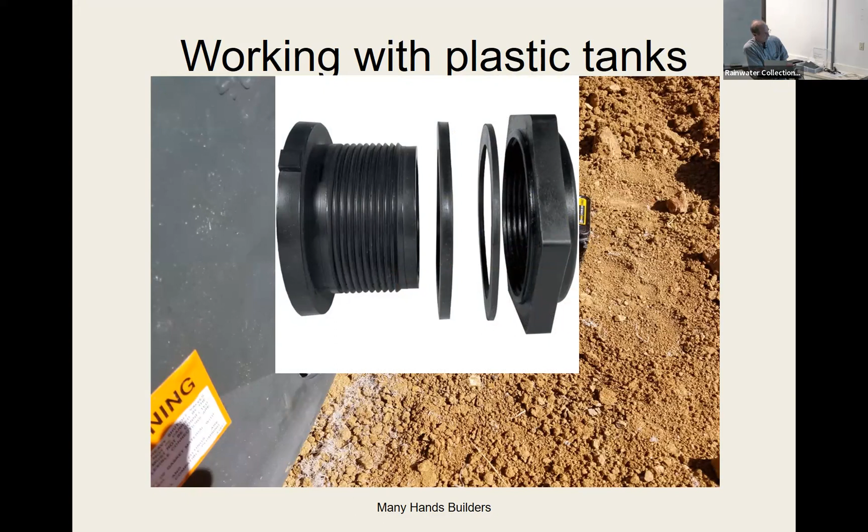I have a couple examples up here. The bulkhead fitting is inserted from the inside. This rubber gasket goes over that, and when you tighten this nut, you compress the rubber gasket against the inside surface of the tank, so it's very tight and water won't leak out of it. Usually we go hand tight, and then we use this really complicated tool made out of plywood - just a wrench made out of plywood - to go another quarter turn, just to get it tight enough. Each of the manufacturers of these bulkhead fittings probably has some sort of foot-pound torque requirement, but I don't have a torque wrench that big, so I just go with what they recommend: hand tight and then a quarter turn beyond.

Now, whenever we install a system like this, we always hire a water truck to come out and fill these tanks with at least a foot or so of water. A couple thousand gallons of water costs you $100 - it's a lot less expensive than discovering you have a leak after you bury these pipes. Then we'll go ahead and backfill after we've discovered we have no leaks. And I think I've had a leak maybe once over many, many jobs, discovered before we buried it.

I should point out this black material right here - those are rubberized couplings. You could also use Fernco fittings, which is a rubber coupling. It's not for pressurized use, but it gives the system some flexibility. We live in earthquake country, and what you don't want is to come out after an earthquake and discover all your water's gone because the tanks were moving and the pipes didn't move in the same direction, so they broke. This doesn't guarantee the pipes won't break, but it gives you a little flexibility in the system, way beyond what rigid PVC pipe is going to give you. So just about every system I've done has a Fernco fitting, some sort of rubberized or flexible coupling, at the joint where the manifold meets the pipe at the tank itself.

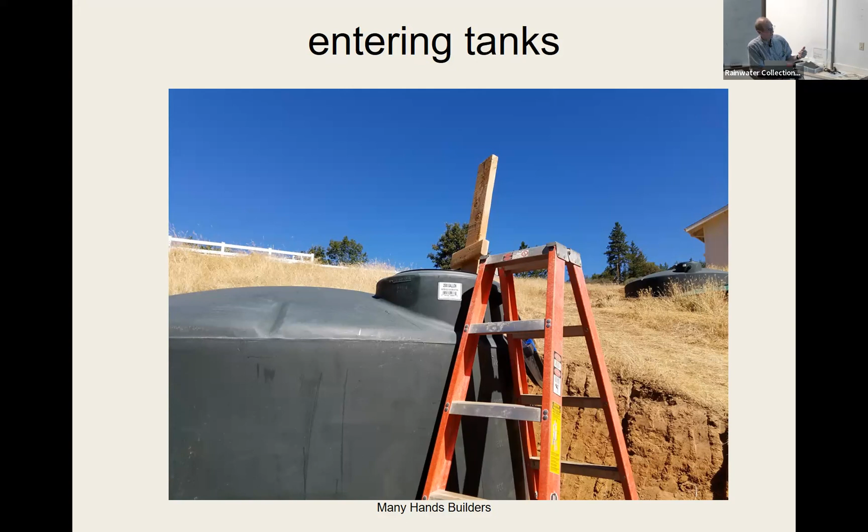Now, getting in and out of a tank is an OSHA regulated proposition - it's a confined space. So you want to either do this when the tank is on the ground and you can crawl in when it's laying on its side, or when it's upright like this, have someone else help you. You have a sturdy ladder on the outside and then what's called a single rung ladder on the inside, and it gets you all the way down to the tank floor. It's too tall to actually slip out. From the inside, that's what it looks like. You can get inside, clean tanks out, put those couplings in, or those bulkhead fittings in, do whatever inspecting you need. Generally, I've only been in tanks maybe a dozen times - generally you don't have to go into a tank.

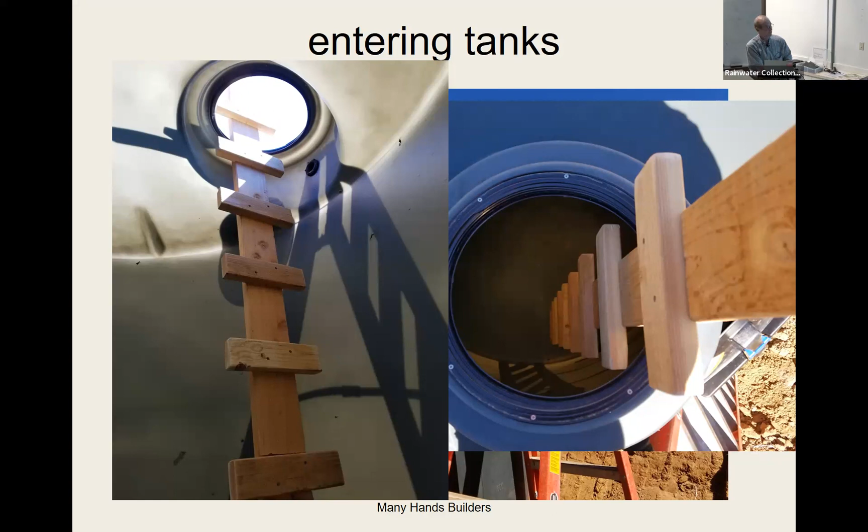These have some sort of flexible coupling. This isn't my project, but it's probably spa hose, which receives PVC cement on some of them. If you use spa hose with a shut-off valve at each one, you can control when you use the water. So this one could be completely empty, and if all the other valves were turned off, they'd still be full. Or you could leave them all open all the time, and then the tanks would all fill together and empty together. There's a lot of ways to manage these.

This is an exposed manifold. I think whoever did this was probably going to bury it at some point. I hope they did, because foot traffic will break these, as will freezing conditions.

So what we typically do is put our tanks and pipes in at ground level, then backfill 8 to 12 inches, about the height of a valve box, which is usually 12 inches. Our area has a 12-inch frost line, and if we wrap these pipes with insulation first and bury them with 8 or 10 inches of soil, not only do we keep the tanks from shifting when they're empty and it's windy, but we also insulate those pipes against freezing.

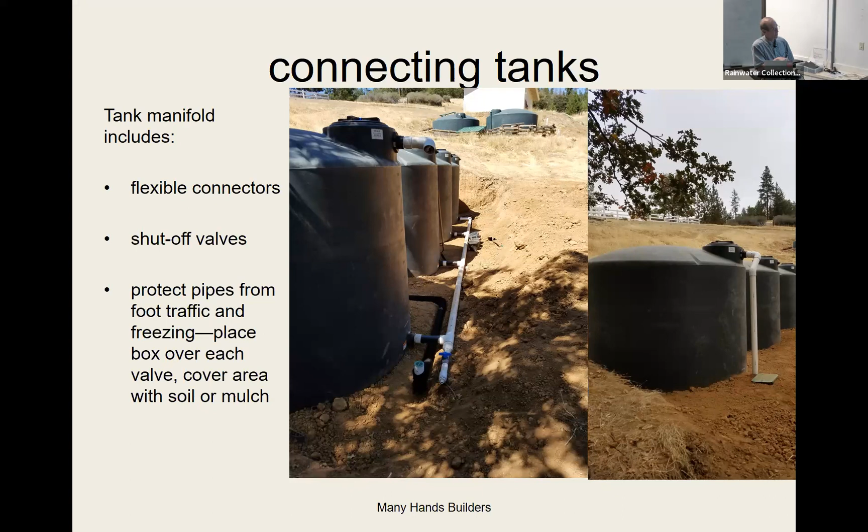Yes, it looks like those are on native soil. That's correct. Did you compact it first? Yes. Not necessary to do, but I like to do it just because it's a good idea to make sure you're putting those tanks on something that's not going to compress any further. It's 8 to 12,000 pounds per tank, really, it's a lot of weight. Well, I'm thinking because we have clay soil too, and when it's wet, it moves all of it. Yeah, it seems like in the winter they might want to sink in. If your clay soil is relatively thin, and there's bedrock underneath, it probably won't sink very far. But if it was, say, 8 or 10 feet of clay soil like we had in Sacramento where I used to live, yeah, that could be a gumbo problem.

Okay, so other ways to connect tanks. You can have them connected at the top. That's an overflow connection where this one fills, then empties into this one, which fills and empties into this one, which fills, and then the outlet overflows to some point of beneficial use. Each tank at the bottom has a valve. This might be July, August, and September, that might be how you think about your water use.

Or you could connect them at the top and the bottom, and the bottom connection could be valved or not valved. I prefer to valve them because it gives you more control. If you had a leak in one of the tanks, you could isolate it and deal with that without losing the rest of your water. You want to make sure that as this tank fills, the volume of water coming in could also escape to the next tank. I've seen a lot of systems I was asked to fix where there was a 3-inch pipe coming in, but only a 1-inch pipe going out.

If a volume of water was filling that 3-inch pipe flowing into the first tank, it wasn't going to get through that 1-inch pipe to get to the next tank soon enough. Most of the time what happens is they lose that water out the manway cover, or if they have a vent, out the vent. Not catastrophic, they just don't get the water unless it causes a big erosion problem. But best practice is to always make sure that the way water escapes the tank is the same size as the way water gets in.

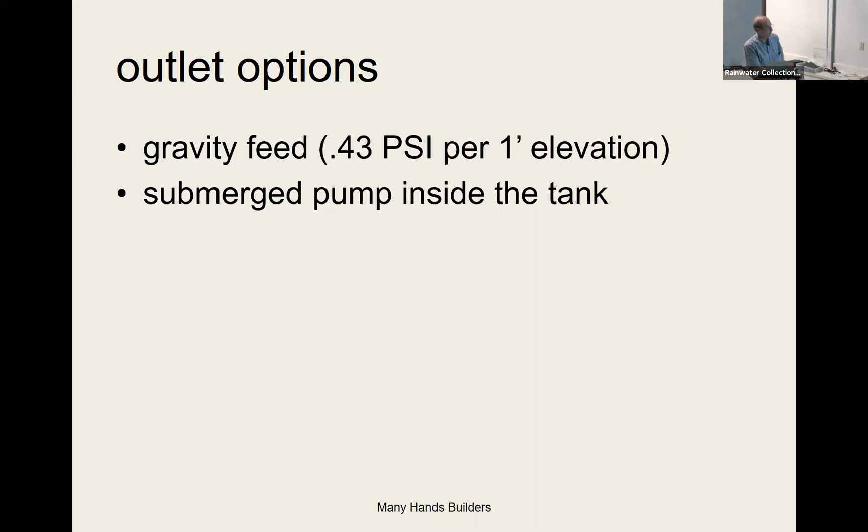You could have your submerged pump inside of a tank, which is a great way to go because then the pipe or the pump generally won't be able to freeze, especially if the tank is full of water. In our climate, most of the time I leave a 5-gallon bucket of water on my front porch in the wintertime. I'm at 2,500 feet, and there might be 2 or 3 inches of ice on the top, but it's never frozen solid. So I'm pretty confident a 2,500 gallon tank wouldn't freeze either, and that would protect the pump itself.

However, if you have a shallow well pump in a building or a setting alongside outside the tank, you want to winterize it because they will freeze and crack. However, this is the most inexpensive and most common way that people pressurize water, with a shallow well pump that has a pressure tank associated with it, or a somewhat more expensive variable speed pump that senses when pressure is drawn off the system and ramps up its revolutions. It's a more complicated machine or motor, but they're really nice.

And then some people who are concerned about fire will want to make sure that somewhere on their system they have a fire hose pump that can drop a tube into the water so that firefighting vehicles can get water out in a hurry, or they have hose threaded outlets on some of their tanks just so a firefighting unit can pull up, plug in, and get ready to go. I'll get a little bit into the threading for that.

A lot of us have a combination of all of these. I have a pump that I can put on my tank, I've got fire thread on some of my outlets, and some of my system is gravity fed. That's true for almost everybody I've worked with. We have a couple of different ways to get water out of that tank.

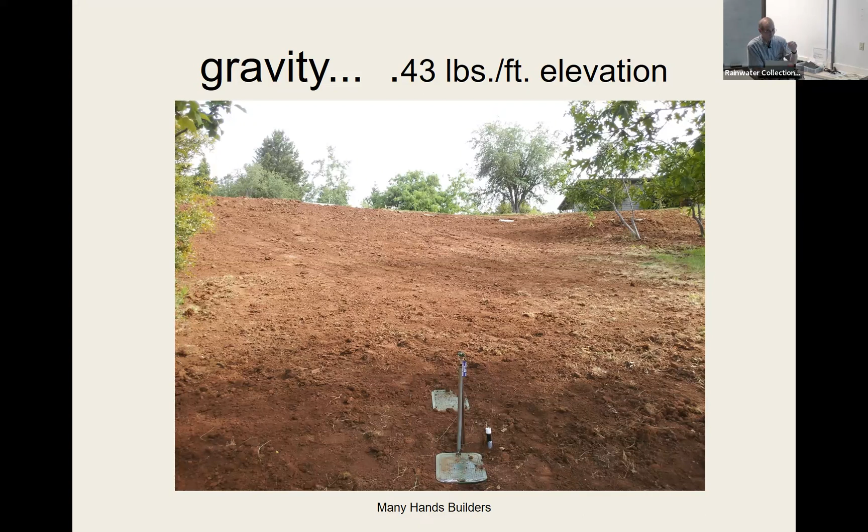You can have a float switch inside the tank that, as it drops and reaches a certain level, shuts off the motor so it can't burn out when the tank is empty. Some of my clients have chosen to do that. I still haven't because I monitor my water every day just to see how much we're using. But it's something I recommend if you're worried about burning out a pump.

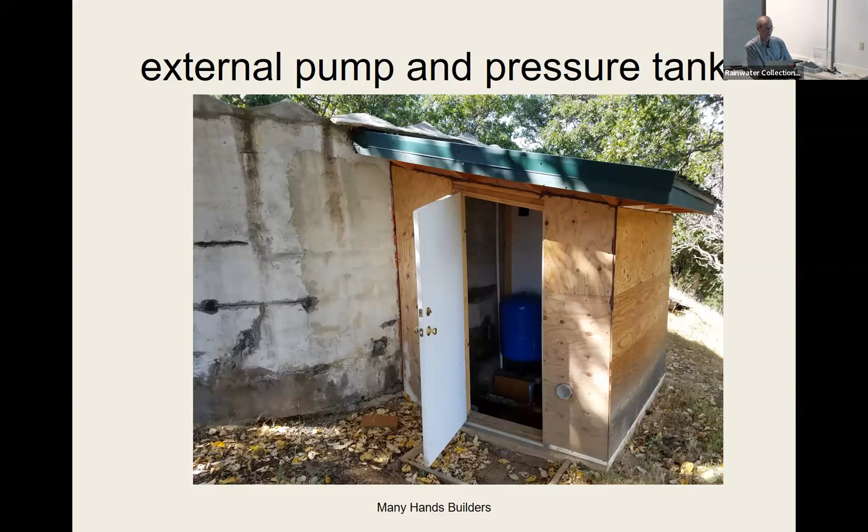It's insulated because it gets cold there. There's a very small, I think a quarter horse pump with a very small 5-gallon pressure tank, and it passes through another type of filter called an Amiad filter, which keeps the things out of water that would clog your emitters, because these irrigate a garden and they don't want to have to change out their emitters every few years.

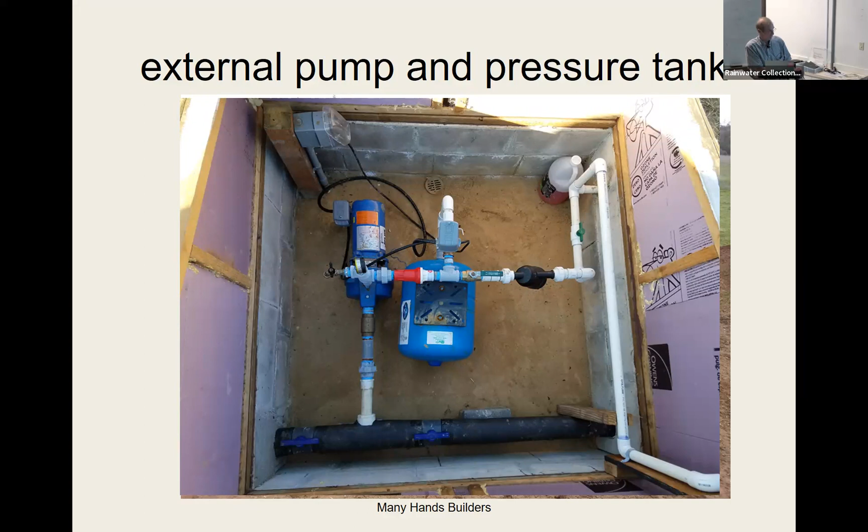So, post-tank filtration: if you're watering livestock or doing flood irrigation, or you're concerned about fire protection, you don't need to do any post-tank filtration whatsoever. Whatever comes out of the tank is good enough for that application. If you're drip irrigating, consider these Amiad filters, and you'll see one.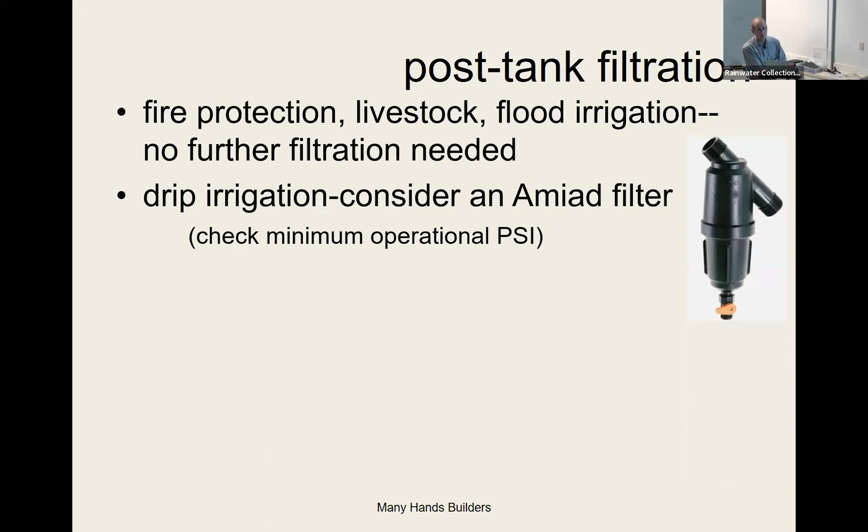I can maybe even take it apart for you on Saturday. If you're drinking the water, it needs a great deal more work. There's usually a coarse filter, a micron filter, and one of these may or may not be charcoal and ceramic. They have to be occasionally replaced completely. Then you need a UV filter, which by code requires replacement every 6 months. The UV kills whatever bacteria and such that might have passed through these other filtration devices.

If you're in a place where you don't have drinking water because your well's gone dry and you can't see paying someone to bring 2,000 gallons of water to your house every week, this kind of thing makes a lot of sense. But last time I did one of these, it was something like $8,000 to install the system, and there's a fair amount of maintenance involved. If you don't have any other choices, this is a great way to go, but I wouldn't do it just because it's a good idea.

There's another one of these Amiad filters right here.

Okay, so overflow. I think we're getting towards the end here. Overflow is where tanks flow from one to another, or to a point of beneficial use, when the system is full and you have more water coming at you than you know what to do with. You've got to find a place for it.

I like to get as much water in a tank as possible. If I just let the overflow sit at that level, that's 3.5 to 4 inches of water I wouldn't have in the tank. So I take an elbow fitting, turn it up, and glue it at that end, and I get an extra 4 inches of water out of the tank. That could be hundreds of gallons, which for some people is a lot.

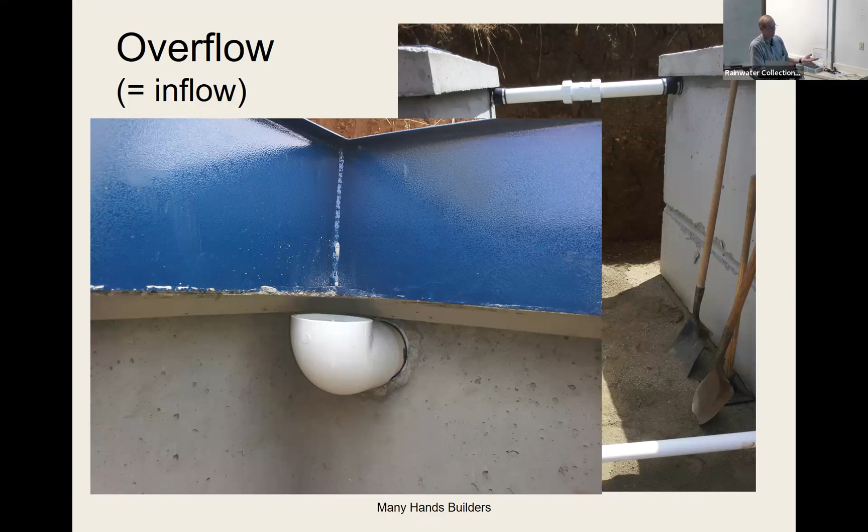Mice and debris - well, there's a lid on these, so they're closed all the time. On the outside they're screened so things can't crawl up the tank, although if you don't screen them, probably things could. These lids are almost always sealed and usually locked, because an open tank, under case law in some states, is an attractive nuisance. You don't want kids climbing in there and not being able to get out.

Here's an overflow system right here, where at the very top water comes out, goes down the hill, and ends up in a dry well. It's a 3 to 4 foot deep well, a couple feet in diameter, lined with hardware cloth so burrowing creatures can't fill in that rock bed. The velocity of the water coming down the hill is broken up by all the rocks, and while the water may bubble to the surface, for the most part it stays in place and infiltrates at the bottom corner of this lot in Talent.

Whenever you have overflow, you want to find a beneficial place for it to go, somewhere that's not going to cause erosion. The trees and bushes that live near that overflow will think they've moved to Coos Bay.

A couple of safety issues - you're going to be digging, so always call the dig hotline. Because if you think you have a day-long project ahead of you and you hit wires, it's a lot longer than a day.

Again, the confined space guidelines - don't go in a tank alone, unless it's on its side and you can just crawl back out and be safe in there. Lock them if you can, or just don't leave ladders leaning up against them.

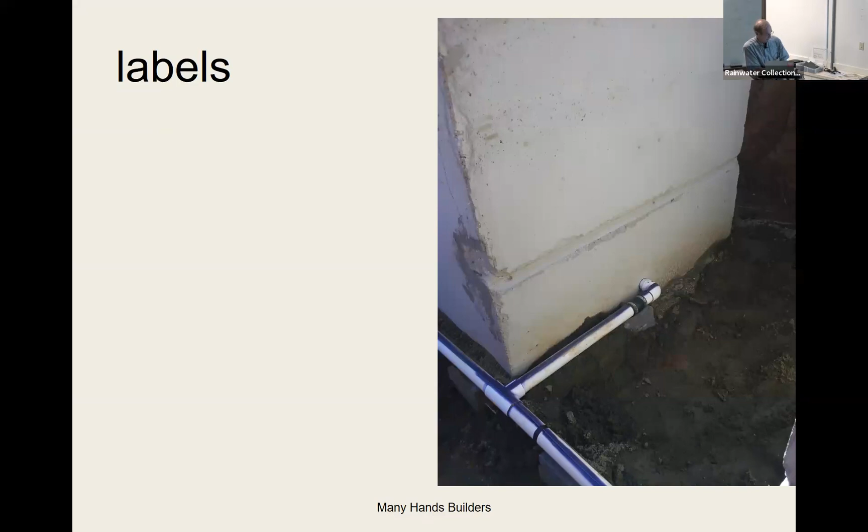There's a requirement - I think the next slide goes into this - that rainwater pipes can be identified by spray painting them purple, or by buying tape that says rainwater and taping it to the pipe. So 20 years from now, someone's digging, they hit the pipe and wonder what is this. Oh, it's a rainwater pipe, we'll just reconnect it, not pressurized, not a big deal. Whenever you have a faucet that's non-potable, you should identify it so people don't drink it.

It may not hurt them at all, but it depends on the condition of that water. So caution, 'non-potable water, do not drink' is sufficient. There may be something in the newest code language that prescribes what you should say, but this is what I've always put on my systems.

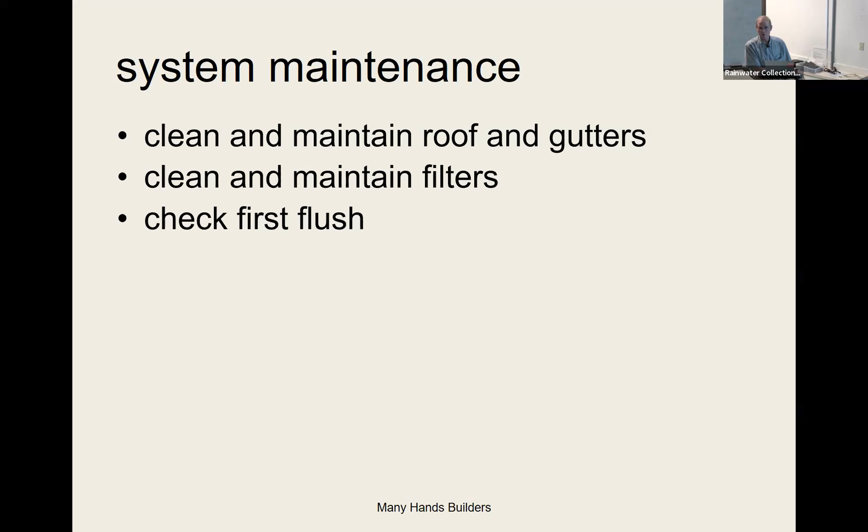Maintenance - keeping your gutters and roof clean is critical to keeping the water clean. Maintain the filters once a year; if you have a lot of pollen or leaves, maybe twice a year. Check your first flush fairly often if you have one, especially with an asphalt shingle roof, because particles from the asphalt shingle will plug the little weep hole, and if you get a cold night, you might get cracked pipes.

Monitor your water level if you don't have a low flow indicator to tell the motor to turn off, and check for leaks periodically. It's not difficult to do - usually you'll notice if your tank's dry and it was full and you hadn't turned anything on, but sometimes you'll see it leaking out the side of a drain pipe or something. If it's for potable use, there's a prescribed regime the state requires you to go through to make sure your water is safe to drink.

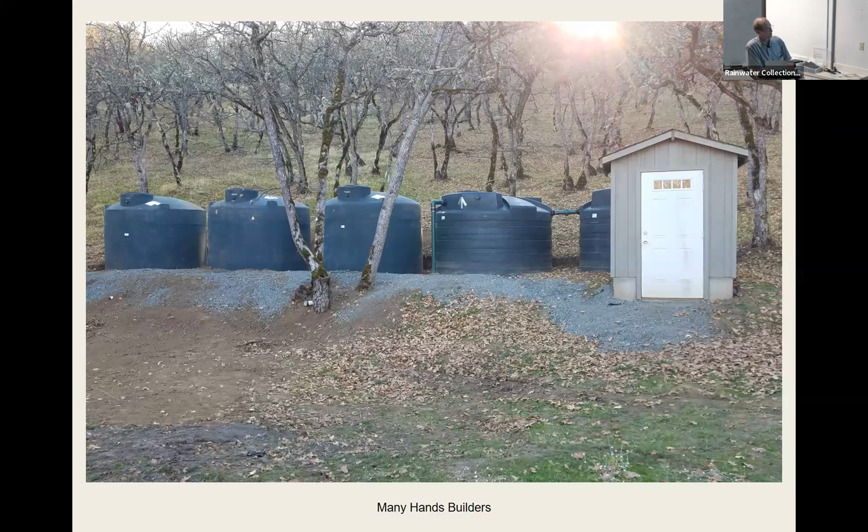So a few years later, we just added 3 more tanks. Whenever I design a manifold, I always stub out the outside end, anticipating that's something someone wants to do. This is the pump pressure tank house, which was electrified. They already had electricity near their well, so they pulled power from that 20 feet to where this location is. It wasn't expensive to do, though they did have to pull a permit. That's into a clay hillside with gravel that's been compacted for a base.

And if you're thinking Rube Goldberg could have done this, you're right. But sometimes you get that where your roof is lower than your tank, and the water has to go down before it can go up. It gets a little complicated, but it's all doable. It's a little bit vulnerable in case one of those pumps goes out and I don't know it, then the whole system fails. The simpler you can make these, the better off you are. But sometimes you just can't control that.

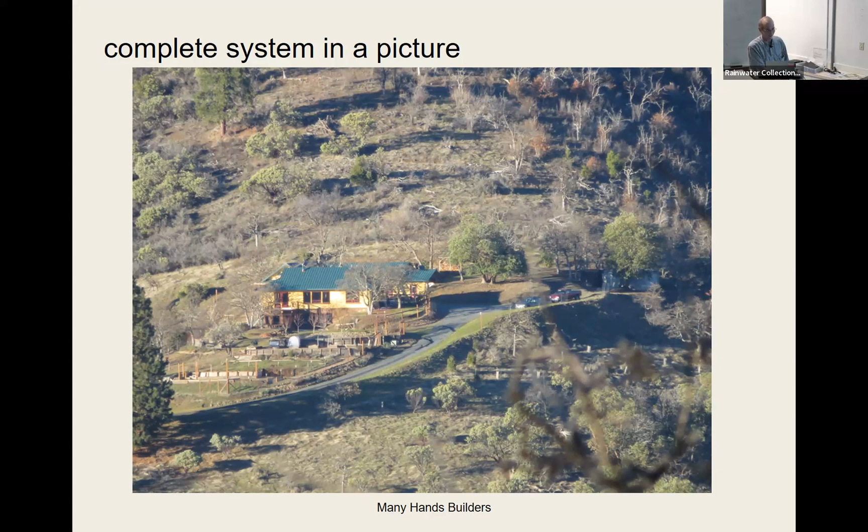Could I do it all over again? I would have purchased this piece of BLM land right here, built my house up there, and water would have drained into that tank and gone by gravity into the garden. I wouldn't have had to use electricity at all. But the BLM wasn't cooperative.

System you'll see on Saturday. We've seen this already, that's part of their system. They too wanted to expand it, so a few years later we added this series of tanks to collect water off of the roof.

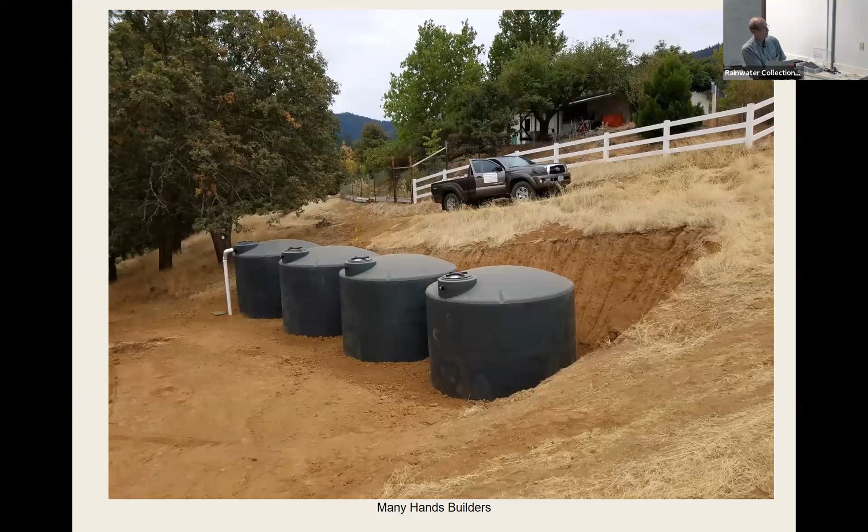We didn't want to pull an electrical permit. So what the client does is, when this set of tanks is empty, which is permitted to push water all the way to their garden, they get out a portable generator and a little trash pump, and they attach a garden hose to it, and they open up this box where there's a faucet, and they turn on that generator and pump, and they pump 10,000 gallons from here up to these two empty 10,000 gallon tanks, which are connected to the system they spent all the money with the plumbing and electrical permit on. I thought that was a great way to go. They didn't have to get permits required for this lower system.

Again, we've seen the system once before. It's a small 500 gallon tank in Talent, with room to expand another 6 or 7 tanks should they want to do that.

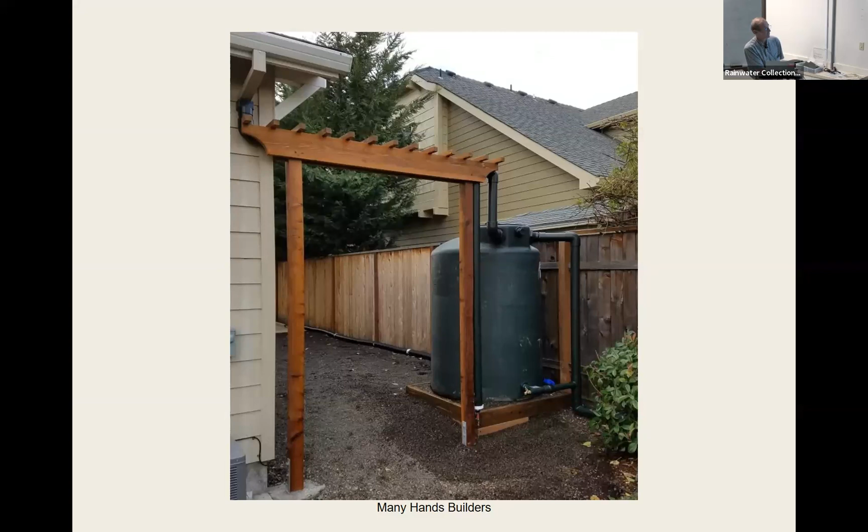Small job we did in Medford, rain barrels that were watering a bonsai garden area. What's unique about this is this is a system. You purchase these downspout filters from a company. I'm not sure where they got this one. This is what they had when I got there.

They wanted to expand it a few tanks, but also make it, prevent it from freezing in the wintertime. So what we did is we put the valve that turns each of these tanks separate from each other inside the tank. To access it, they have to open the lid, use this device to turn this valve. Right now it's in the off position, but they can see down it when it's full of water. And then they would open this, and all the water that would be exposed to freezing drains out of the manifold. Then it's fine to go through a cold snap.

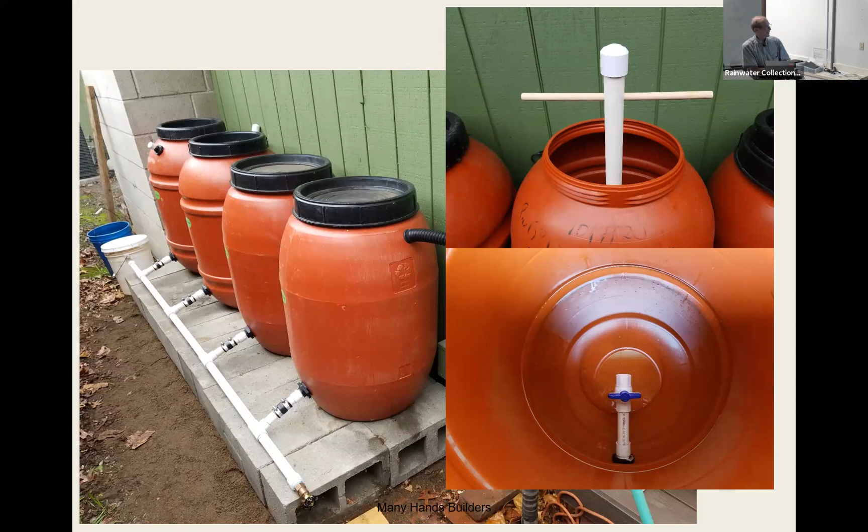So it drains out just because it's not pressurized, but gravity, right? The question is, it drains out - if it's not pressurized, how does it drain out? The gravity flows. You'll see these Fernco fittings again, these rubber couplings that give it some flexibility.

In case anyone steps on this, I think they put a plywood plate or something over this to keep it from being degraded by sunlight. They could also wrap it with insulation if they wanted to. But these Fernco fittings, rubberized couplings, give it a little bit of extra flexibility.

System up on Elk Creek, which is a potable system. At the time, potable systems required a concrete pad - I don't think that's the case anymore - but there are 2, 2,500 gallon tanks. The client was going to build their own pump house right here, and then the plumber they hired installed the filtration system across the meadow at their house.

We had to add a fascia to the side of this pole barn and then make it deep enough so we achieved that 1/16 of an inch drop over 60 feet. We had to have the first flush and all those different things, and there's stainless steel screening on this, all in the code, but this is for potable water. I think their issue had to do with poor well production.

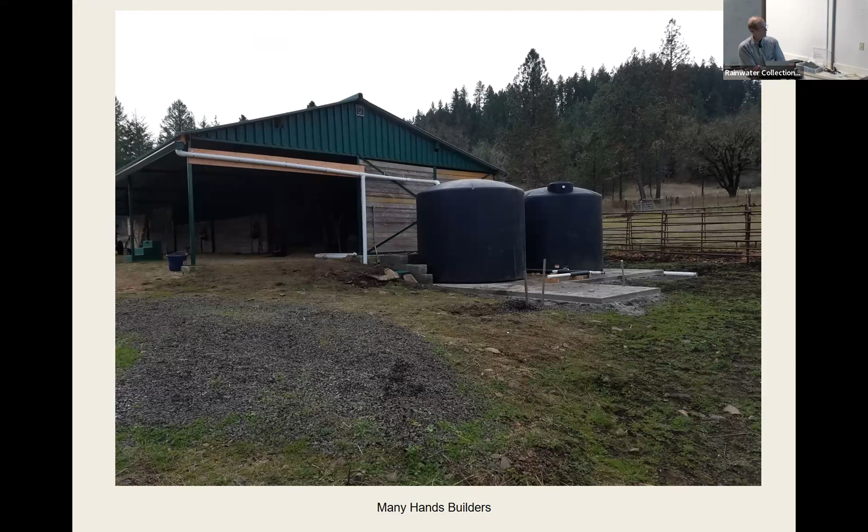System out in the Applegate, used strictly for watering horses in the wintertime. The client did not want to be carrying a 5-gallon bucket a quarter mile down an icy road every time they had to water the horses.

So this water comes off of both of these roofs, goes through the stainless steel screening on them, drops into the tank, and then there's the overflow. There's a faucet right here, and they just put a bucket under that, take it to the horse stall, everybody's happy. They can knock out this wall right behind here and put 6 more tanks in there if they wanted to collect water from the rest of this barn roof. This little surface here was enough to cover the 2,500 gallon tanks, but not much more than that.

Okay, I think a lot of this was already covered, if I'm not mistaken.